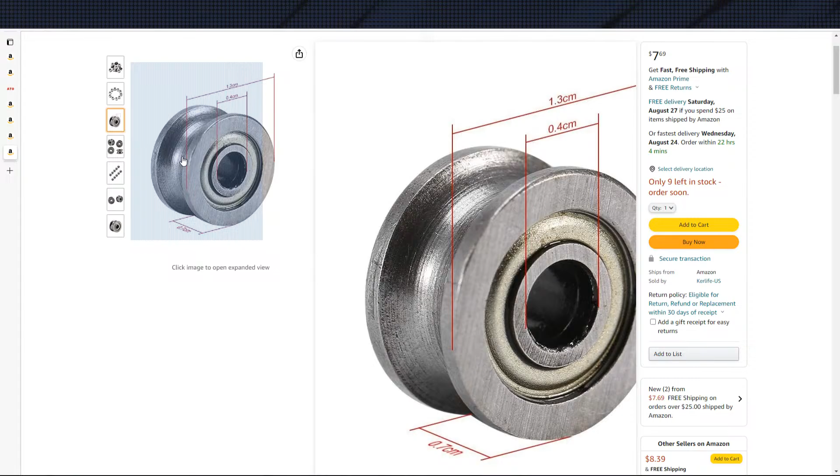Along those lines, this U-groove on this specific model, you can see it says 5.2, which sounds too big to me. The depth on it is only 1.8, so it may not be too big. However, I'm pretty sure that's too big for the 5mm rods we were looking to use, because that should introduce slop up and down, perpendicular to the rod, since you have that extra space. So I'm guessing these ones in particular are a no-go. However, we do have other ones with smaller groove width. Here we go, this is 4.5, and these ones I believe were even smaller than that. Yeah, that's 4mm right there. These are V-groove though, so these ones are V-groove, these ones are U-groove.

I'm assuming anything under 5 should work for us. I have not bothered grabbing any CAD models yet, I'm just going to do a quick model up and we'll go from there. Otherwise, I believe that's everything I wanted to touch on to get us prepped for this stream. So we'll switch over to Fusion now.

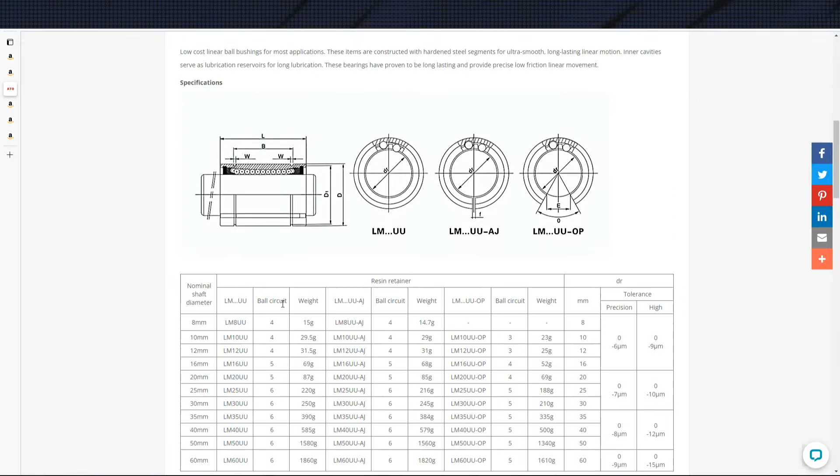Okay, if that 15 is the OD... okay, I thought this was D. Okay, my bad, I can read, it's fine. This D is the OD, so this chart is actually split up and down. I thought these were two separate ones, I thought these were like LM90s, honestly, is what I thought I was reading.

Okay, gotcha. Although theta is still missing for this first line, which should be our 8. Everything else says 80, and I still don't see E anywhere, unless you do. Do you see E? I don't see E. If I had E right here, then obviously I could figure out what that angle is easy, but I do not see the E.

Let's see if we presume those are 10. So I'm going to guess, because the angle gets smaller as we go down, that the LM8 open type is 80 degrees. Now this is very concerning right now, because A, this was the only place I could find these listed, and B, it's not even on the technical chart here, the open type, which suggests that maybe they don't sell it.

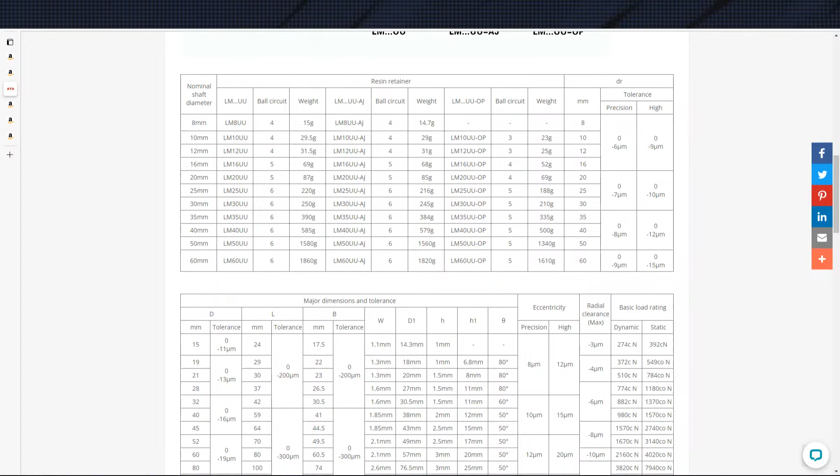So if I hit the add to cart button and tried to buy it, I might run into some issues, so this might be going south very quickly. Again, I wasn't planning on it, but might in the future do it for fun, and that doesn't appear like it's going to work. I just minimized that for you guys, so let's kick you back over to Fusion.

And we are just going to go with 80 degrees and hope that that is acceptable. Grab the outside, and hope we can actually eventually get these.

This is a solid model, I found out. I went to earlier on. Let's see, really quick, let me get a vertical. I went to slice it earlier to look at what bearings were on the inside for the informational stream, and I noticed that it was a... click, please.

Huh, fascinating. Okay, I noticed that it was a solid model, unfortunately, so when we slice this, it's just going to be a wall, is what it comes down to. Distance, symmetric, all... there we go, so you can see it just ends up being a wall. I had been hoping that these models were actually detailed with bearings earlier on, because I wanted to know what the bearing size was. They are not, but frankly, it doesn't necessarily matter to me.

And there we go, now we have the open type bearing. And now we'll go ahead and model up really quick the U-groove.

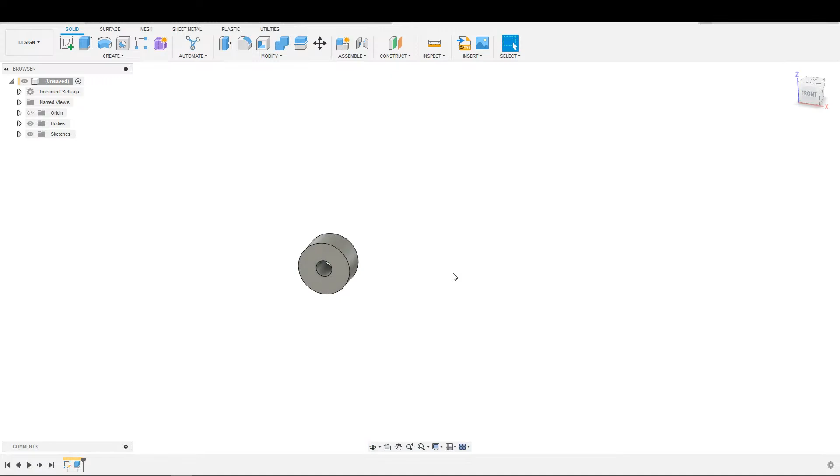And let's see, how do we want to model this? We don't normally do sweeps, so let me do a sweep here. Intersect that guy, body that guy. There we go, there's that.

Here is my circle, this is dead center, the depth here. So I guess I will, one of those things, 1.5 ways to skin a cat. I think I'm going to do this and just make this tangent to keep my life simple. The depth on the groove is, and it's possible that instead of this being a circle, I need a spline line. I'm about to find that one out. U-groove depth, 1.7. 1.7.

Actually, I take that back. This needs to be there, and then we can check the diameter, because that would be the opening. So 3.4 is definitely smaller, so it definitely needs to be a spline line or an ellipse. We have ellipses, right?

Yeah. Let's see, let's do that. We're gonna quinky-dink that and make sure you quinky-dink that. Good. And then this opening is 4.5.

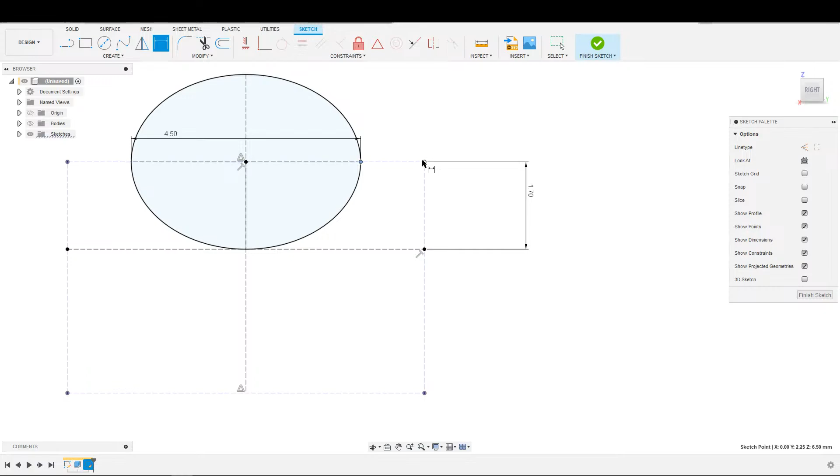Alright, that says 4.5. I guess that's about right. Back to zoomed in pretty close here, so it's just playing tricks with how it looks. I guess if I zoom all the way out, it probably looks more correct.

So let us now try to sweep, because again, I do not do sweeps very often. Sweep. I don't think a revolve is going to work, but we can always try revolve next if that doesn't. Sweep. Cool, there we go.

Nice, sweep worked. I'm kind of curious, so let's try revolve too. The revolve will go around the axis. So yeah, actually revolve should work as well, because I have this axis right here. There we go, 1.5 ways to skin a cat.

Actually, that came out with fewer defects on the surface. So if I suppress this real quick, you see how we got these little random defects there, whereas with the other one we don't. So I think I'm going to just stick with the revolve.

I was going to do sweep just because, again, we hardly ever use the sweep function, but as it turns out, the revolve one looks better.

And that is - so the only question is, do I want to put the little bit of effort in just to separate the bearing from the wheel? I wasn't going to. Let me take a quick look at this picture.

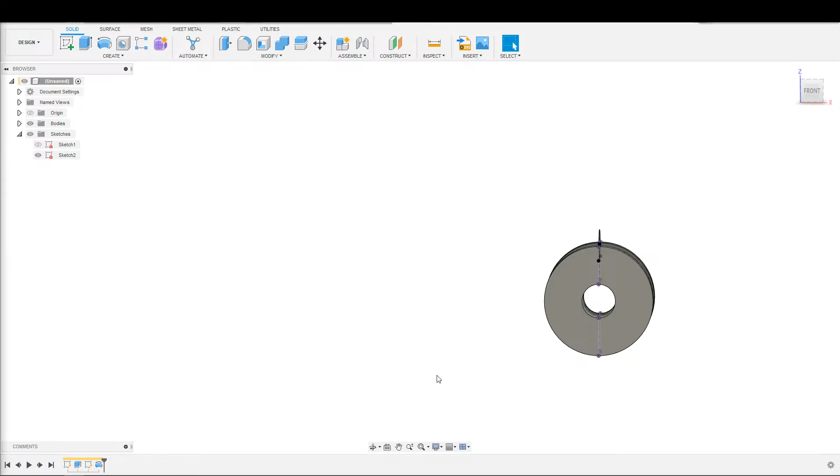We should probably get back to designing, because for my purposes, I don't particularly need the bearing visible in there, so we will just hang out here, leave it as is. Oh actually, I totally didn't notice because the sketch was there.

We got a line on here, top here instead. Alright, you know what? Fine, if I'm going to end up with a line either way, we'll do the sweep one. Oh wait, there's a line on 2 sides now.

Alright, how anal do I feel like being? Just one side? Alright, just one side, we'll live with it. Alright, and save that as U groove.

Let's see, do these have - what are these referred to as? Alright, it doesn't look like they have a code, like a special designation. So I guess I will just say 4 ID, 13 OD - I'm going to leave the thickness out - U groove bearing, and that will be fine.

And now we can go ahead and start working on the linear slides for both types. So do I have a random 8mm rod just for the heck of it?

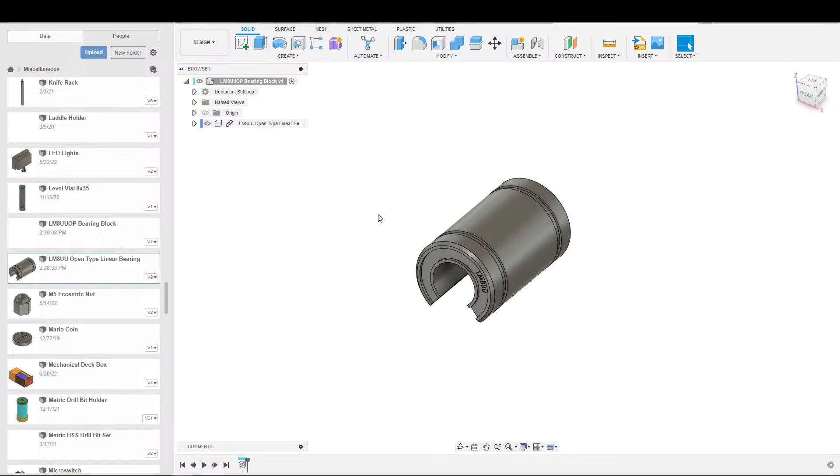Let's see, we're only doing the bearing block in this design, so I'm going to go ahead and not bother creating a subcomponent because it's going to end up being, I believe, just one solid block, so it's not that big of a deal. I'm pretty sure we're just going to do this.

The one issue that I saw going into this is how to keep this from rotating. So in theory, this bearing can rotate around inside of this block bearing holder. Now on some designs, certain sizes, they actually put a plate and rivet the plate to the bearing and to the bearing block.

So the bearing block is riveted to the bearing via this plate that they put on it. But that was only on certain sizes from the same company. It's not like I was seeing different companies do different things—it was a company that for specific sizes did that. On the other sizes, even the larger sizes, I could not tell how they were keeping it from rotating inside of this bearing block.

For us, I think my recommendation is going to be to super glue this in here. Super glue or epoxy it. It's one of these deals where I don't particularly like that solution, but at the same time, I'm going to project out this guy right here, and we're going to actually stop the block parallel with that. But at the same time, point being...

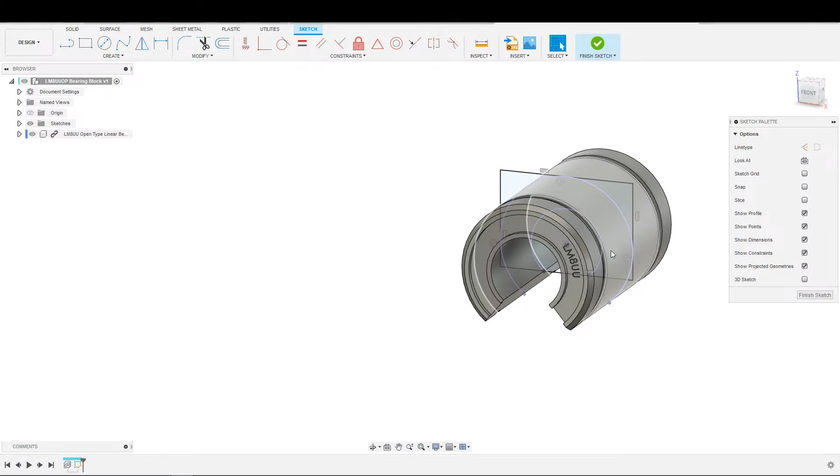The alternative is to do set screws and just put pressure onto the bearing to try to keep it from—if you drilled it into the bearing just a hair, or maybe enough that you don't damage the races, in a specific spot so you don't damage the races, and then put a small set screw through there, that would be the alternative to it.

So that's an option. It's just plastic at this point, so all you really have to do is drill through the plastic. It's simple enough to add just a simple hole in the side. Maybe I do go ahead and model that in as well. I wasn't going to—the point of this conversation was that I was not going to bother worrying about that. But maybe I'm wrong. Maybe I decide that it is simple enough to do.

Now, for this wall, it's one of those things—the whole entire point, as we discussed in the previous video that you should have watched, is to be relatively rigid. So I'm thinking thicker walls is what I'm thinking. The next problem, it's not so much a problem.

Let's see, what kind of bolts do we want to use? So to mount the track to the ground, I saw somebody say that they were using 6mm bolts. But to mount... I forgot to check what kind of holes they come with standard to mount to these linear blocks. Let us see.

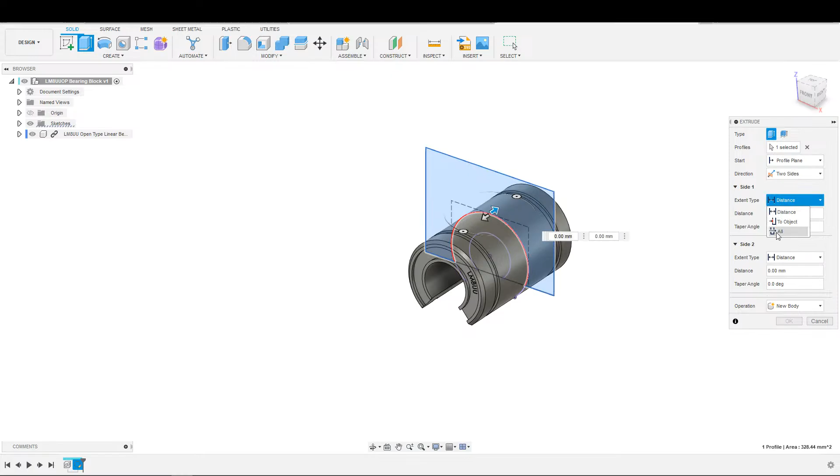And the other thing is, to help this not fall out, I'm thinking of putting a lid on the front. So yeah, I guess we can extrude this here, and then I'll extrude a second one afterwards.

I was thinking about whether or not I do an offset right here - that was the design decision. Probably not necessary, because we can just come back and hit the E button again, pop the sketch back open.

Bodies, grab everything this time, or not everything, but both of those things rather, from object, there, or actually not there, I take it back, turn the body back on, there, -3.

So again, I'm expecting there to be something holding this on the inside to begin with, so the wall thickness on the ends I'm not as worried about, so I'm not going to make it 5 like the other wall thickness.

Create feature, mirror across midpoint, which is - we're building on the origin right now, so we get to use that. Sorry, that didn't look like I grabbed the midpoint, but okay, there we go.

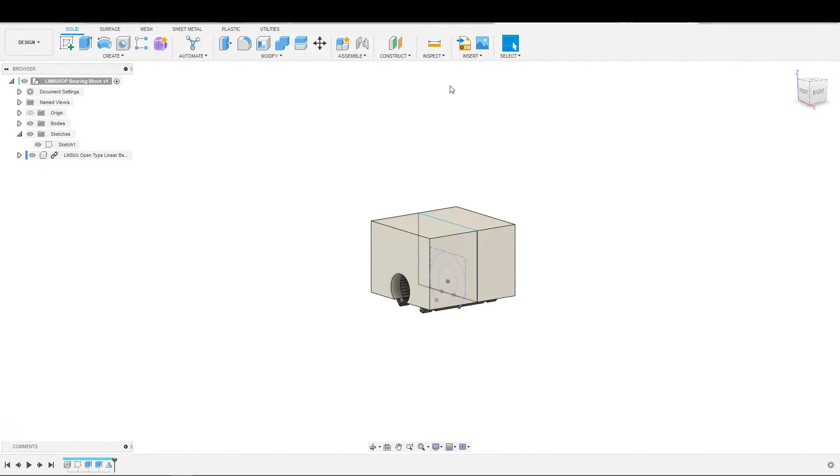Let me get this a different color just to have an easier time differentiating it. There we go. And now I want to come up here. Let us make that plane.

So this is bearing layout. Again, trying to stay a little bit more organized with my sketches, since we have down pat staying organized with the planes now. Top of a bearing block. Bearing block. There we go.

Now let us look at how these captured nuts line up. So I said, if I recall correctly, 8 point - no, it was, bother - 7.8.

Just double checking my calipers really quick. They're 0. Okay, they're reading closer to 7.85 now, so we'll go with 7.85.

Also, that line does not look center from this perspective. Huh. Fascinating. So that is, yeah, okay. Things went weird here. We will come back to that.

7.85. Let me just see what this looks like, because we need to come back and determine. Let's see, this needs to be - I guess the captured nuts could come in from either side, so I'll make them parallel to this edge. And then we'll plan to feed them in from this edge. 7.85.

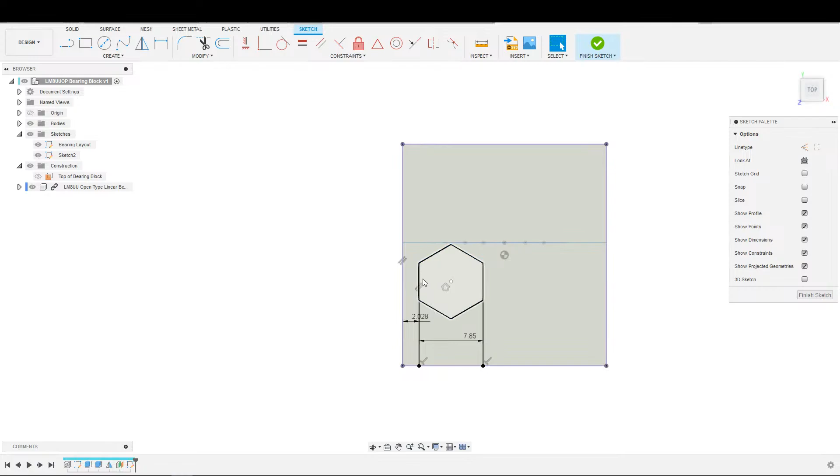So the other alternative is to feed it in from the bottom. Normally I would put a slot in here to feed this in, but that's a pain in the butt to get the bolt back out if it strips out or something like that happens. I've been defaulting to putting a hole in the bottom and pulling it all the way through. That's not that big of a deal for this design, so I think I will.

However, as previously stated, we do need a wall thickness here to keep this from rotating out, and as we can see, that does go directly through the bearing, which is what I wanted to check here.

So we have 3 options. One, we can make this block wider. Right now this is the minimum width I'm willing to make this block, but we can make it wider. Option 2 - for the record, right now we might be able to fit 4 on here, but we don't really need to.

Fact of the matter is this could go dead center, because these styles of bearing blocks need to work in tandem to stop them from tipping back and forth. So you generally have 2 sets of rails so it stays rigid perpendicularly, stays perpendicular to the platform you're mounted to.

So we really could just get away with 1 if we wanted to, put this dead center of this block, because we're going to have another one over here. Or we could have that, obviously, if we're only using 1 of each of these block bearings per rail. Then we only have 2 connection points to the rail for whatever we're holding.

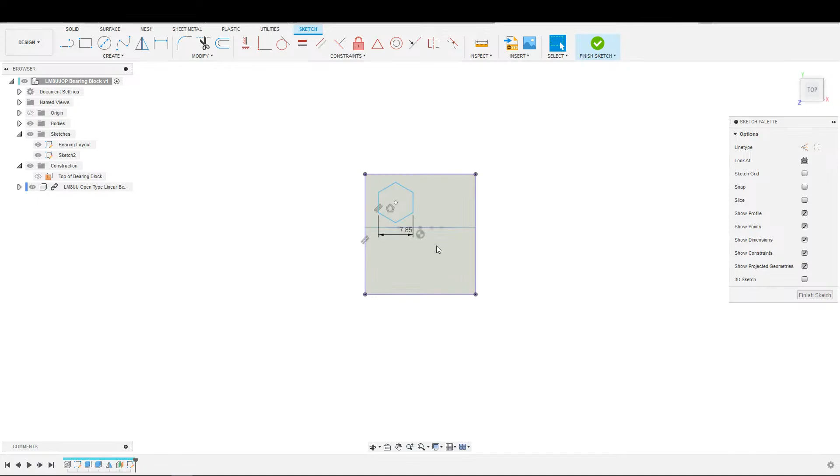Alternatively, we could have this here and another one up here, again dead center. Then from there we would have 4 points. The connection point would be dead center of the block, which is nice. Yeah, you know what, let's go ahead and go with that one. I'm going to put this dead center then, in that case. I've talked myself into it. You will be dead center.

And I actually think, instead of being parallel here, I'm going to drop it through the top. So the bolts will have to go in before the bearing is fixed in, and once the bearing is placed in, you won't be able to get the bolts back out if you glue it in. This is a problem. The alternative is to make this wider if we are going to take the bolts out the bottom.

Alternatively, we could keep it oriented in this direction and have them slide in. The fact of the matter is that if these guys strip out - this is the argument that it doesn't matter, okay? It's the argument I'm presenting right now - if these guys strip out, in that case, this plastic is absolutely worthless.

We need to get the bearing out of the plastic and print out a new plastic piece. So at the end of the day, it doesn't necessarily matter that these bolts are stuck in here, because the only situation in which it matters is if the nut itself strips out - if the threads on the inside of the nut strip out, then it matters that we can get the nut in and out. Otherwise, if it's the plastic which fails, which is the more likely scenario, the whole entire plastic piece is broken, so we've got to replace it anyway.

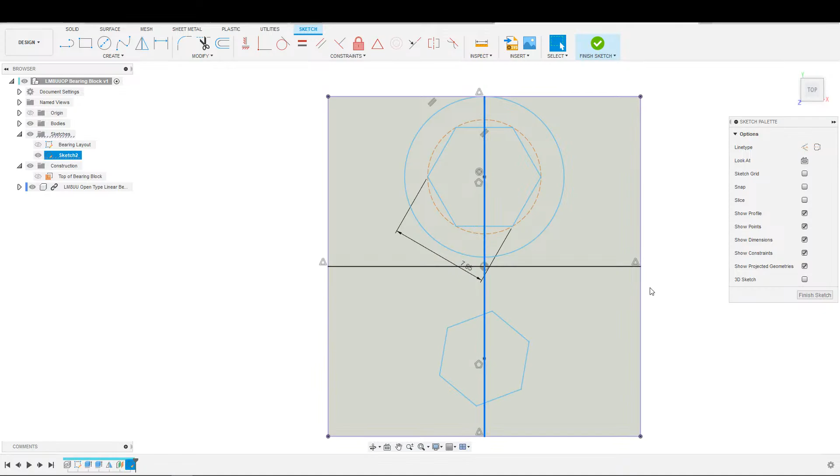I still haven't technically - I know I'm bouncing all over the place with my explanation - but let me do this: delete that, and get this centered on this line segment. Get this perpendicular, get this midpointed, and then get this guy midpointed to that. Alright, now we have an actual distance here, which is 2.8 something, so nearly 3 millimeters, so I'm happy with that. Okay, cool.

And then we can go ahead and make this a 6 millimeter hole, or a 5 millimeter hole, sorry - we're using M5s.

There we go, these circles are no longer important. Right now it's saying I am not constrained because I did not actually get centered. Okay, and you are also not centered. There we go, I'll go ahead and do this one. I had this other guy in here just in case I needed the distance between these, but the distance is going to be fine at this point.

Now let us double check our centering here because something seems to be wrong before we do these extrusions. Here is this, here is my origin. That looks centered. Let's really quick take and inspect just to make sure.

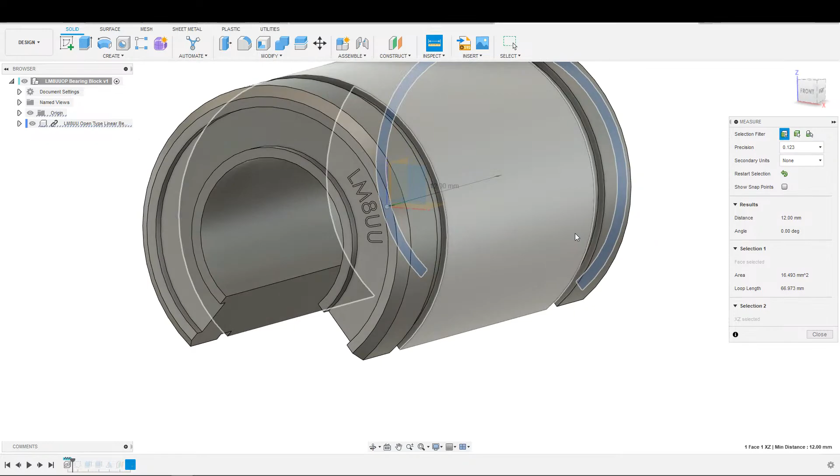That is the wrong plane. This is the farthest snap point right here. Okay, well it doesn't necessarily matter, I could do any point so long as I'm consistent. 12 millimeters, and I think these are 24 millimeters wide, so that would be accurate.

Okay yeah, so this is centered. That is good. So what happened here with my extrusion to make me off center? That appears to be centered. That looks accurate. Okay.

And that mirror does not look accurate. Okay, the preview was accurate. The mirror was not actually accurate. As always - well, not as always.

Since the changes happened, Optimize still does not work, unfortunately. It's funny because I think I've said this before in another stream, but it almost feels like they actually swapped Optimize and Adjust, and Optimize is now no longer - they're backwards now, rather, is what I should be trying to say. So it is Optimize that works, and Adjust that doesn't, because Adjust is doing what Optimize used to do, at least that's what it feels like.

So make this parallel again, and now we're good to extrude because everything will be centered. So distance all, flipperoonie, get rid of the LM8 to make sure we don't accidentally kill it. Extrude, this is captured nut, mounting hole and captured nut.

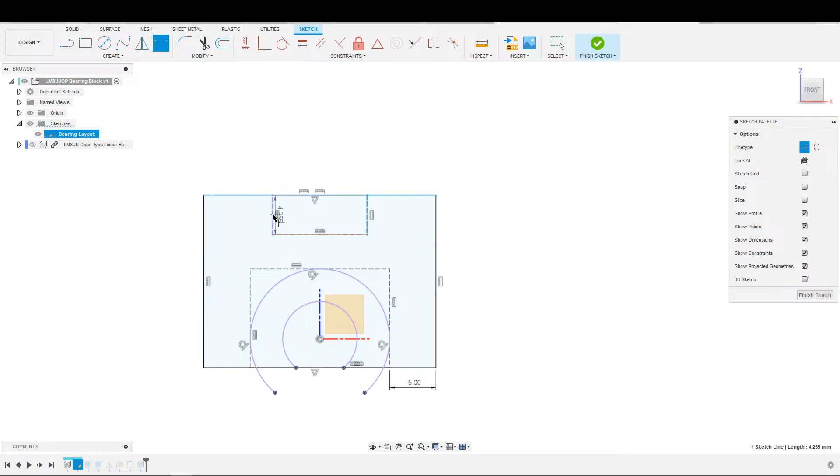Don't tell me I'm going to get this. 7.8, I think it was 7.8, I'll find out. And this was 7.85. Oh that's right, this was 7.8 I believe the first time I measured it, but it came out to 7.85 the second time. Anyway, point being is now I can go ahead and toss.

Yeah, never mind, I did this backwards. That is the nut at the top. We want - try to get a hold of that line. Please, can I have the line? Thank you. Uh-oh, I connected it.

There we go, there we go. You should be centered over here, rather, is what I wanted, because this is where the nut's going to be. And then we're going to have this 3 millimeters of wall above it. There we go, that's what I wanted to fix. And now we can go ahead and extrude this out.

Offset -3 millimeters. And distance all, actually, because again we are going to just countersink that all in. Flip that around, there we go. The bearing is still off, so we're good. And hit OK, now what is unconstrained over here is my last question.

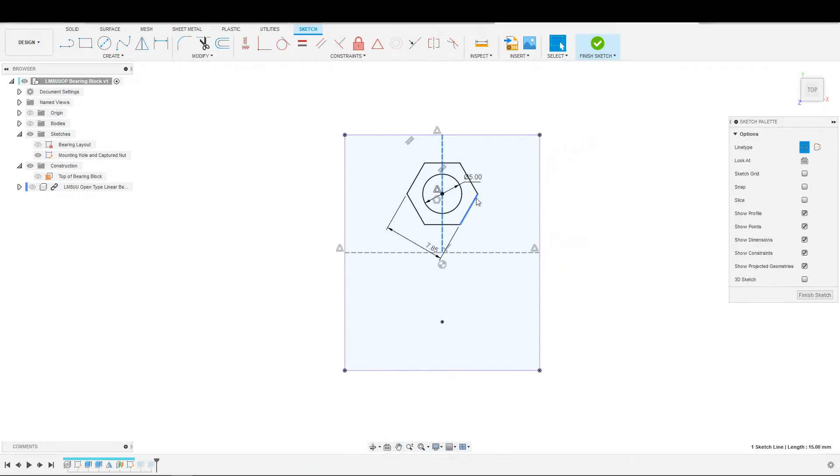I do not see anything unconstrained, but it says that my sketch is unconstrained, and I am very particular about that. So let's start dragging stuff and see if we can't make anything move. Doesn't appear that we can, so I guess I just got to give up and cry about it. Okie dookies.

So back to mirroring these features, those two. Okay. And for right now I think I'm going to keep everything tight. Maybe not this, we can probably open this up just fine without causing any problems. And I'll do a full millimeter just because it doesn't matter. And actually modify this one. Features that, okay, there we go.

And turn the 8 millimeter bearing, block bearing, back on. There we go, and we should be good. Oh that's right, I was going to add - I take it back, I was going to add the set screw in the side. Okie dokies, and I guess I may as well do it on both sides. Let's see, from the front, this is the left-hand side, right? Yep, so left side of block bearing.

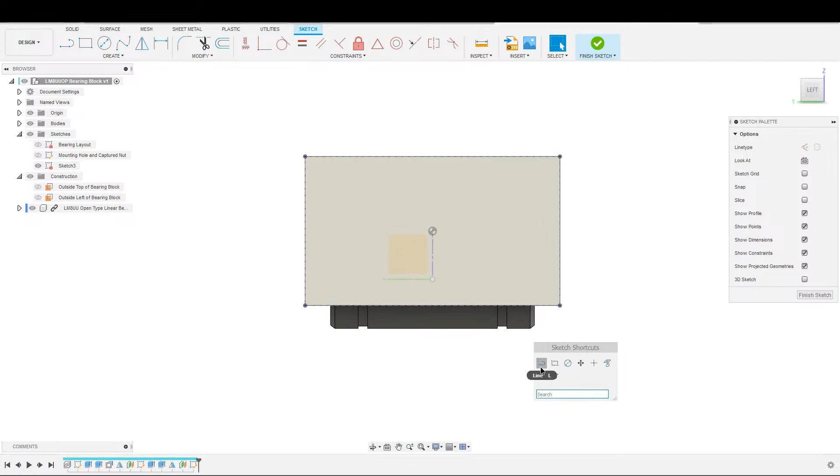Bearing block, outside, and our sketch. It's one of those things, if I do one on each side, we're probably good with just one hole. I'm going to make an M3. Normally I'd keep all the bolts the same, but because we're worried about running into the bearing races or tracks on the inside, I'm just going to make it a smaller bolt, an M3, and we'll go from there.

Distance all, flip - actually I don't have to mirror it if I do that, right? Not that one, I wanted to turn that one off. There we go. And this is the bearing set screw.

Now, the way we have this set up, back to captured nuts and threaded inserts, the wall thickness right here is only 5 millimeters. Let me double check that I have that right. Yep, 5 millimeters. Going into the side of that, looking at my box here, I think this one is a 3 millimeter, or is this 2.5?

Let's grab a 3 millimeter bolt really quick. Where's my 3 millimeter box? 3 millimeters? Yep. Alright, let me just check that this is a 3 millimeter. Actually, no, it doesn't look like 3 millimeter. Looks like it is a 2.5 just from the looks of it, but let me not double guess myself and actually physically check. Okay, yeah, that's a 2.5 then. So that's a 2.5, which will make this one a 3.

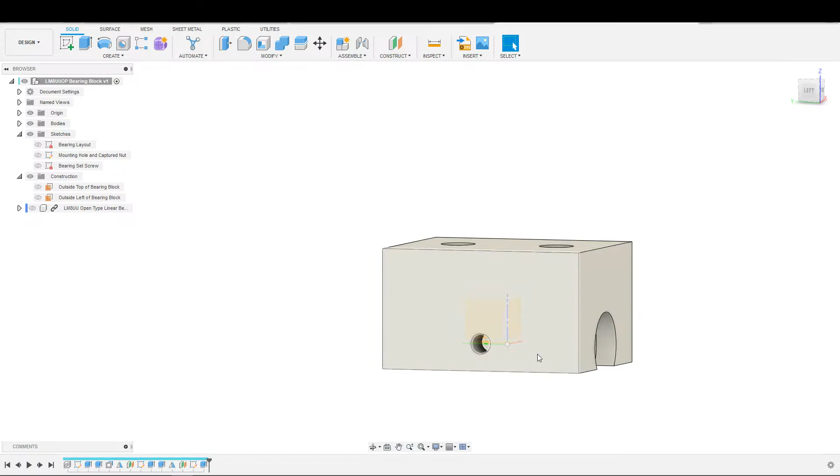But you know what, actually, here's an idea. The point being is that if you drilled a hole in the side of the block bearing - inside of the LM8 rather, not the block bearing, inside of the LM8 - in that case, you could just get away with just the M3 bolt, in theory I believe, because it would probably bite into that hole, especially depending on how exactly you drilled that hole and whether or not you attempted to thread it as well. There's a lot of unknowns here. New component, my brain not work.

LM8UU bearing block with threaded insert hole. I'll go ahead and do this really quick. We said 3.8 was the hole size. Whoops, Control Z. Project - okay, that was the wrong body it projected, so let me make sure that body's turned off. There we go, and we'll make this 3.8 for the minor diameter of the threaded insert. Distance all, there we go.

So now we have two options here. This one will get a threaded insert, the other one won't, at least on these sides here. And that is that.

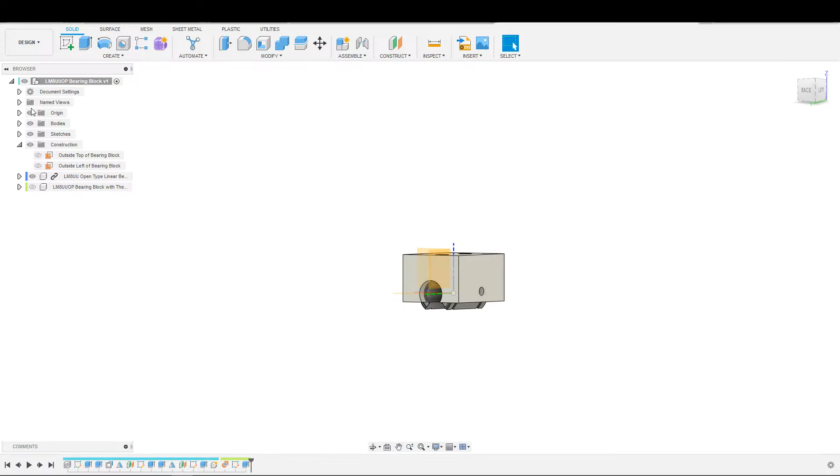So now that we have this done, it's funny because we are already 50 minutes in, surprisingly enough. I swear this stuff takes longer than I think it does.

But I wanted to just mock up how this would work. So we'd have an 8mm rod here, and I'll go ahead and extrude that symmetric, new component, and let's make this 100 for right now for demonstration purposes. 8mm rod. And let's hop in here.

And here is the rub - how do I demonstrate this? I guess from the side. So here is something I realized as we were talking about this, as I was investigating further. As I mentioned, what I found online was that they said that this - let's see, I probably should have drawn this a little bit differently, so this is going to have some extra lines that were not necessary, but that's besides the point.

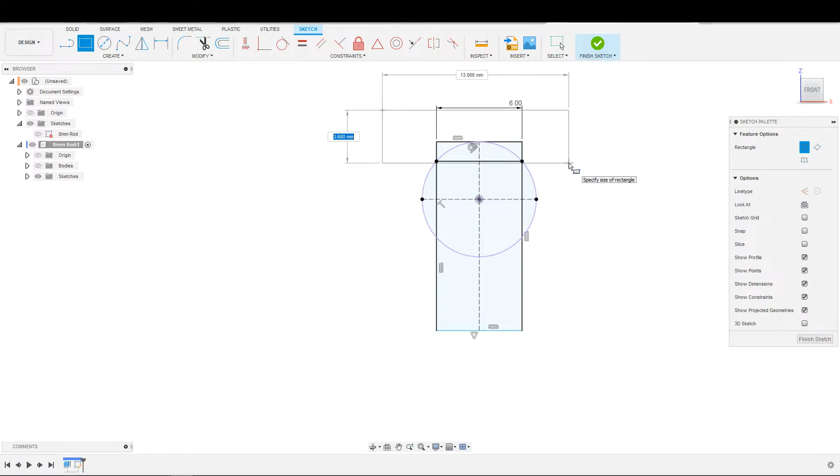There, tangent there, and point being, this is 6mm right here. Okay, so if we look at this line right here, which is where the bolt comes through, as you can see, that is massive in terms of the rod itself. And furthermore, if we draw the bolt head into here, so let's say that the bolt comes out and the bolt head is flush with that, the 6mm bolt head, I believe, was close to 10mm.

The other one I think I just said was 7.8. So, alright, I'm going to call it 10mm for the purposes of this conversation. I don't know where I got 10mm, but for some reason that's the number. Oh, that was a button head. I think the button head came up as 10mm.

Point being is that if we bolt this rod down into the ground with this 6mm, first off, you can see that there is not much rod left on the outside to begin with, which is a bit of a problem if the rod's basically falling apart at this point. The second thing is, if we have the bolt head on top, the bolt head is actually larger diameter than the rod itself, which is another problem.

Now, this is speaking specifically about 6mm, so if we change this to 5mm - okay, so yeah, the 7.8 was the nut. Let me check what the button head is here on the 5mm. Button head is 9, so the button head still doesn't help us much. However, as you can see, we get a little bit more meat here. And if we went to 4 or 3, obviously this would start looking better and better.

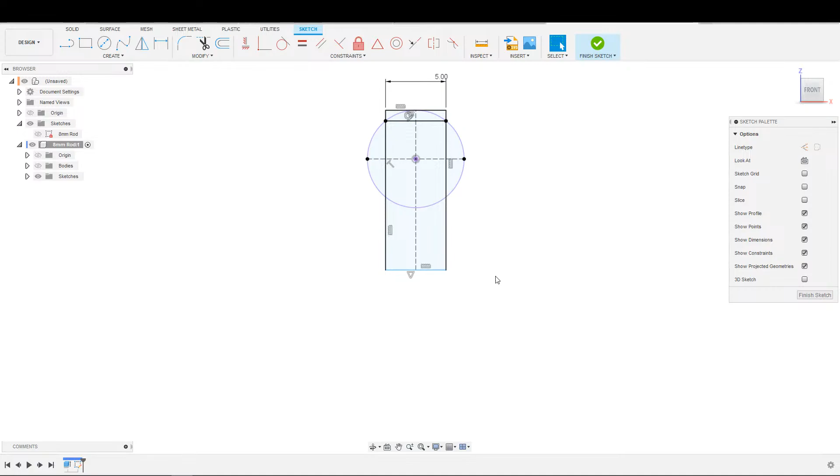However, point that I'm getting to right here is, at this point, it is not really feasible for us to bolt downwards into whatever we're attaching to, which is how you normally use the linear rails. In our case, we're almost better off - let me hit Control-Z a whole bunch, because I want to undo those constraints - doing this instead and having the bolt head down here on the opposite side of what we're bolting into.

Now, this does mean that we've got a blind hole, I think it's called. Regardless, this bottoms out here for a bolt, so we need bolts of a specific size. In this case, this is an 8mm rod, right? So we can only get maximum 4mm here, probably only 3 just to be safe, maybe 3.5. And then whatever we use for standoffs, this bolt more or less needs to be exactly this length.

Short of stacking washers. Let me pull this out a little bit just to demonstrate. Attempt to pull this out a little bit. There we go, I'll just grab that guy. Short of stacking washers behind it, which is always an option - you can always stack washers - so it becomes a little bit more complicated than normal linear rails, is my point.

The other alternative, which I'm a little skeptical of, is to weld the rods onto the bottom of this rod. Rods, sticks, whatever you want to call them. You know, just weld pieces of metal down and then attach a plate to the bottom and attach the plate to the base. That's another option.

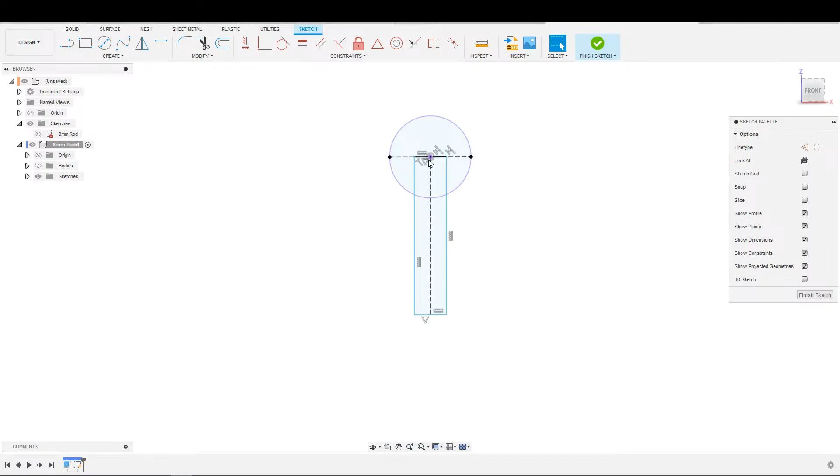So these rods are basically all chrome plated as far as I've seen. You're not supposed to weld chrome, it's bad for you. So I did a quick Google search and people said, well, grind the chrome off and then weld the steel underneath the chrome. We're already past the point of being... well, not at being a maker, but the type of content we do over here. Yes, I've demonstrated I can do a limited amount of welding, but this seems less feasible.

I'd sooner do this blind hole here, again whatever you technically call it, and just thread that in there and hope we don't bottom out. So that's where we're at on the design here. Unfortunately, it does not seem feasible to me to bolt through the top because we cannot countersink the bolt head, which is the biggest problem. If we could countersink the bolt head, then I'd do it. However, there's just plain not enough meat up here to do that on an 8mm rod. So we're going to have to come from the backside and go from there.

Okay, cool, so that is that discussion out of the way. Let me go ahead and, again, we're just going to mock this up really quick. I'm still in a sketch. Tangent off the bottom, reference plane, origin, and 180. Bottom of rod. Project. Turn the body off. Magical fusion double line - what does it mean?

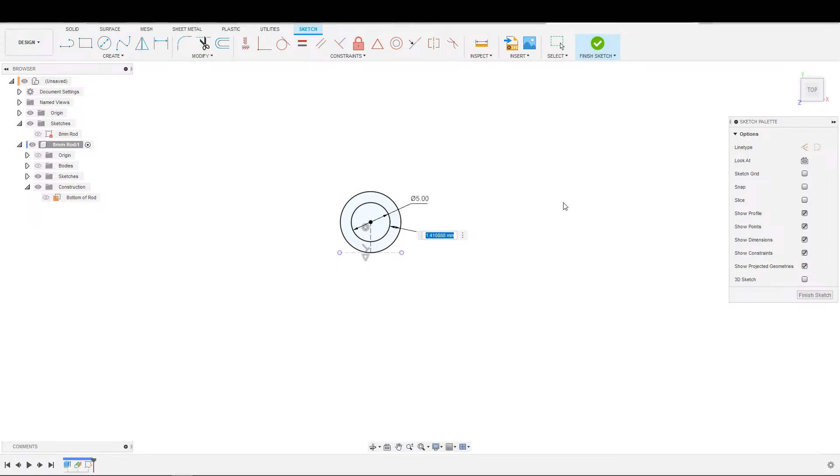Let's do 5mm. Now I'm going to go ahead and... I was going to do the hole first, but maybe I should. Yeah, you know what, this probably should have been in another object, but I'll cry about it. Again, this was in theory just for demonstration purposes. This rod is on centerline, right? All right, good. Two-sided.

Distance to object there, and then other distance is, let's say, 10mm. And these are backwards, so distance 10mm and distance to object. Whoops, wrong object, there we go. New component, I'm going to just join this later.

Actually, this would be the bolt that I've got right here. I'll just call it the bolt. That's fine.

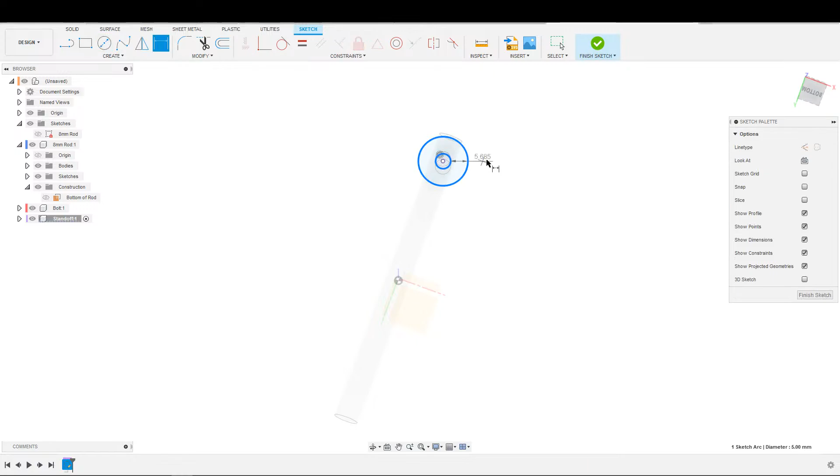New component, standoff. Come in here, come in here. Project out this guy. Toss a wall thickness in there, just like 3 is fine. And then extrude this down. Distance to object. There.

And now we can go ahead and pattern those down the line. Pattern. Whoops, that is not pattern. Pattern. Components. Actually, you know what, maybe I want to just do bodies, just because I don't particularly want to make a whole bunch of components.

That and... whoops, that and... Oh, you're gonna really do this to me? All right, I give up. This is just for demonstration purposes. Huh, okay, you're not gonna give me that, huh?

Let's find a sketch then. Oh, I never... there's a sketch, never named that sketch. My bad. And let's go every 20 millimeters.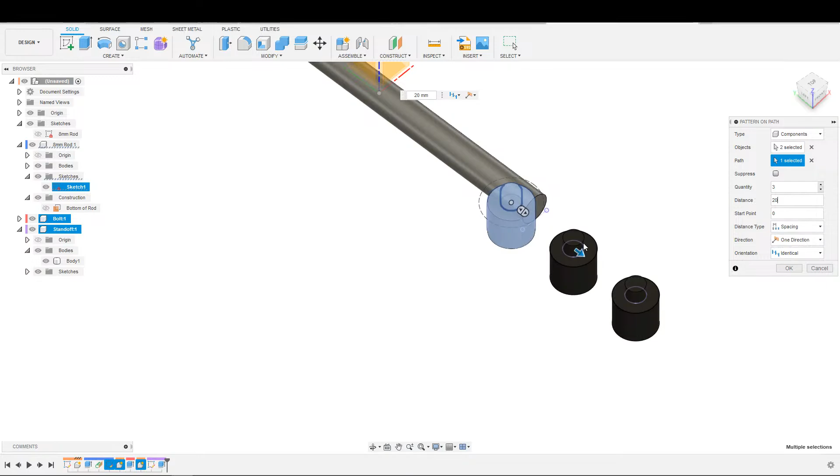Bother. You're being difficult. Alright, well. Let's see, I can't use one to flip it around. And it doesn't let me use the whatchamacallit for the path.

And now, pattern, path, bodies. Yeah, I really don't want the extra components, honestly, so let's try this now. Spacing, I really wish you would. 0. 5 is fine.

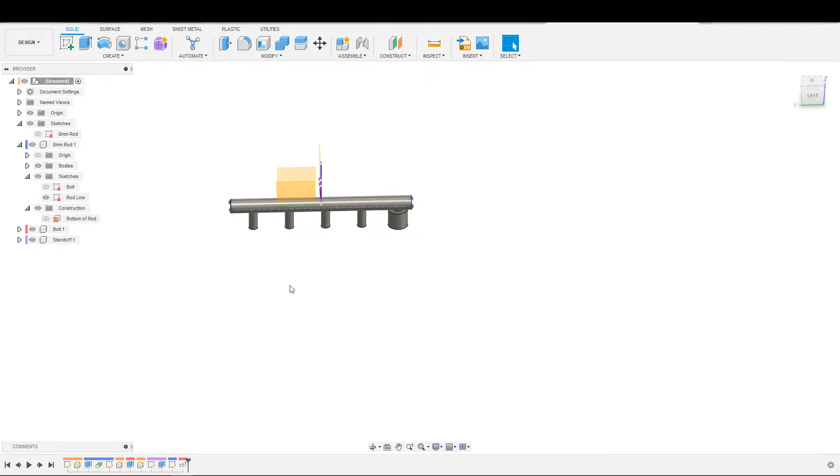And rod line. Just do the same thing on the other one. There we go, select my line. Spacing, I don't know why it defaults to extent. Nobody uses extent, it's a waste of time. You can't even use toObject with extent. If you could use toObject with extent, then it would be more useful, but you can't, unfortunately.

So it is a waste of time. Chrome. Try that again, there we go. Turn this off, this sketch off. Huh, that's... there we go. It's looking pretty ugly, honestly. Whichever. Red. Plastico.

Standoffs, there we go. Let us combine that with that. Putting more effort into this than I probably should have for a demonstration. Keep tools.

And now save so that we can insert LM8UU slide guide. Now we can insert this one into here, that one into here. There we go.

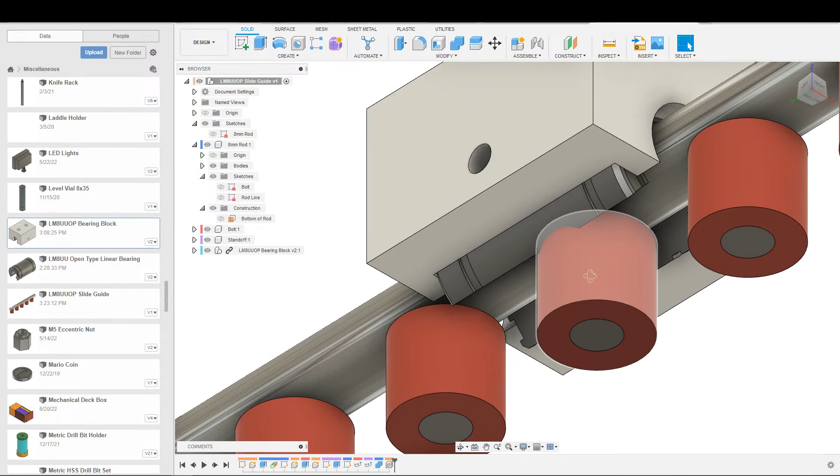And that is fine with me. So looking at it, it looks like our wall thickness is going to have to, because everything's on origin, it all lines up automatically. So it looks like our standoffs are going to have to probably be cone shaped, would be the best, just so that we can still have a wider base. Alternatively, we could always cut them down into D shapes.

The standoffs actually are not 100% necessary. So the alternative actually is to put nuts down here. So you throw nuts down here, weld them onto your platform or countersink them or whatever have you, and then thread the bolts through onto the rod. And when the bolts bottom out, yeah, I guess that's the way to do it.

So it's threading, it's a little bit difficult, frankly, but it should work in theory. In theory, so long as you have everything exactly sized correctly. You thread the bolt through the nut, which is stationary on your platform that you're connecting to. And at a point, so long as the rod is... nah, it's not great, it's not a great solution. I'm going to stop talking.

It's probably better just to modify these standoffs so that they're not interfering with the LM8 open version right here. Simplest, quickest solution. Yep, okay, so that is that. That is our first slide bearing. And we have been going for 1 hour and 5 minutes, which is a little bit annoying because this was supposed to be a quick, stupid, done build.

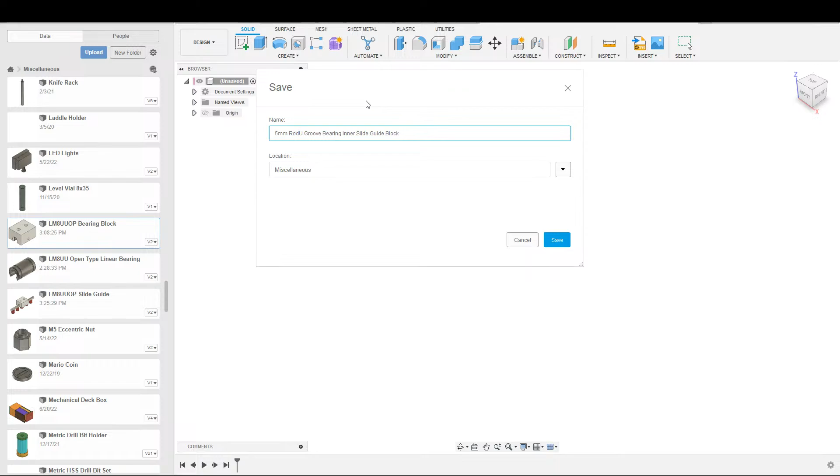I don't know exactly how to describe this, but that's the name it's ended up with. So we're going to go ahead with this one. Since this one wasn't intended to be quick, I'll go ahead and do it a little more professionally. 5mm rod, come in here, make our sketch.

5mm. Actually, I take that back. Let me do horizontal. Rod. 5mm. And our spacing here.

So the funny thing is, actually, hilarious, ha ha ha. So we're going to have a theoretical bearing right here where the OD is 13mm. In theory, I should be drawing this, technically speaking, like this. 13mm, centered here.

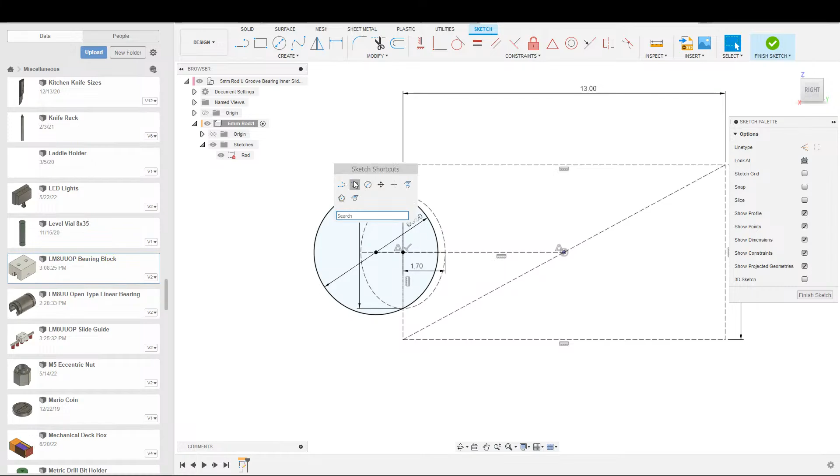So the deal here is that we are going to have, in theory, plates that hold these rods like this. And yeah, I guess that holds it far enough. The only place I was going with this conversation was back to this opening here. As you can see, that moves this further in and gets us closer up here.

But if I make that all 5, at this point, this plate, or this bracket rather, that's holding this rod isn't really holding it terribly well. The one counter argument I'd have that makes it not that big a deal is the same one we did over here on this linear rail, which is, okay, we can drill and tap in the back and bolt the rod to the bracket. That's an option. So back to the fact that we have an option for a 5mm opening.

What do you call it? A 5mm. Oh, actually, here's the other thing. You see how this U is actually outside of here? Let me back up a little bit. So there, if we had something like 4.7, that may be better because now the inside of the bearing is just about touching.

But my point is that if we ever get to where the rod is too far out of this block, the only thing I was getting at is that we can always just drill and tap - yeah, it would be drill and tap, because there's no way we're going to get a nut or bolt head on the inside here. So drill and tap the back of the rod for, say, an M3 or M2, and bolt it to the block. However, I'm hoping to avoid that.

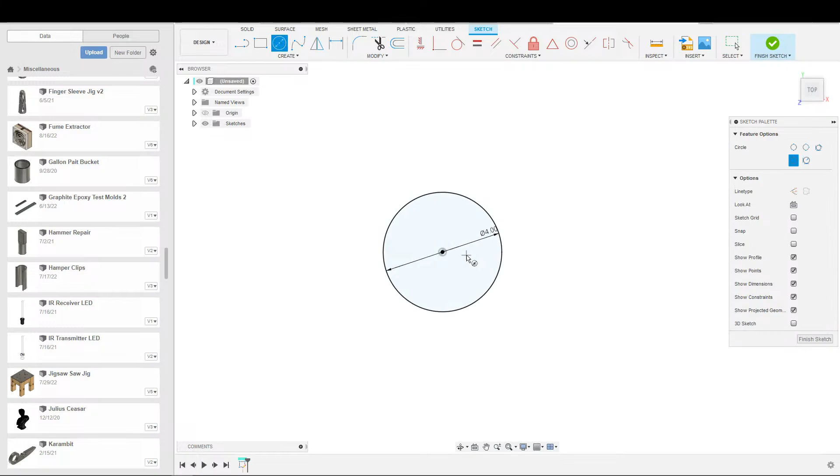Here is our ID, which is 4 millimeters. I should not make that concentric though, because we are not concentric, we are eccentric. And I want a millimeter of eccentricity. There we go.

And then it's a question of what wall thickness do I want here. I guess we'll try to do it with 1. It's one of those things, everything's so small here. I'm kind of curious what I ended up with last time when I 3D printed my own eccentric nut, what wall thickness I ended up on that one.

Can I be tangent to that? That's a good question. Alright, I can. Good. So we can up this wall thickness if we need to. Honestly, it probably should be like 2. And now it's tangent out the other side. Good old Fusion. Alright, there we go. Tangent there.

Okie dokie, so there is our top of our eccentric nut. And I'll just go 3 millimeters. And now, from the bottom of eccentric nut, or I guess I'm going to call this top of hex, because that's easier to understand.

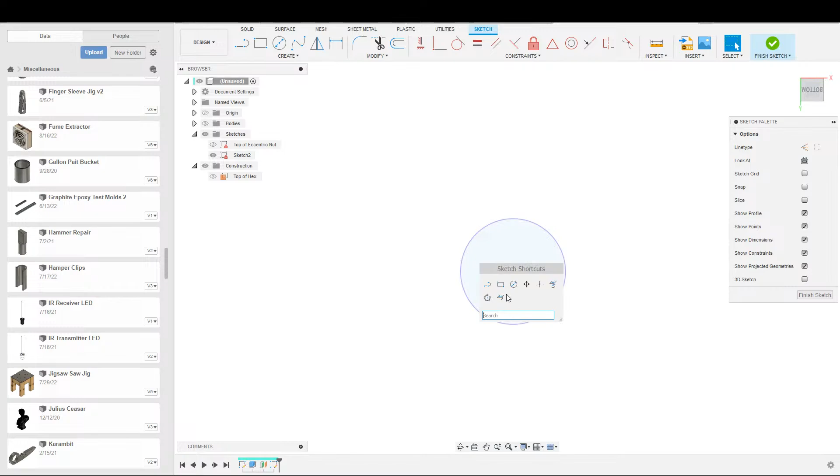One of these things, because everything's off, it makes things a little sketchy to look at. So here is our hex. And let's see what an M4 nut hex normally looks like. M4 is 6.8. Let's see, 6.8.

Alright, that is a lot smaller than what we ended up with. Let me grab the M5 eccentric nuts. Alright, let's see what proportions we're looking at as our baseline. Let's see.

Come on, bag. Actually, why the heck did I get this bag? Derp, we have one right here. This is the one that I drew though, right?

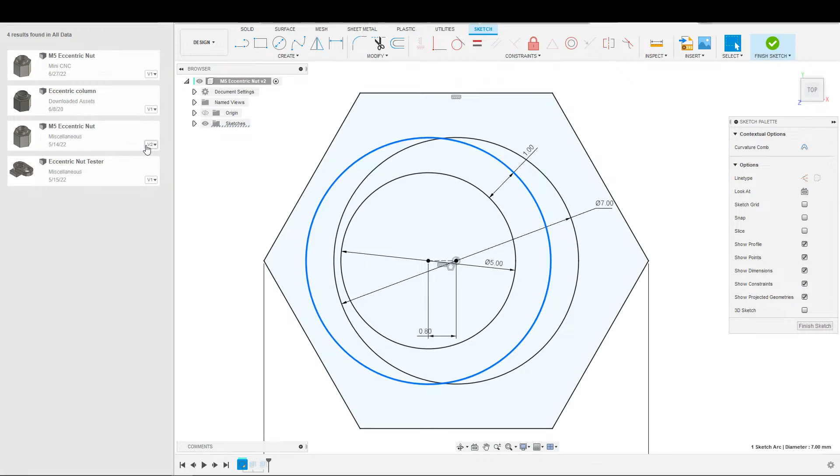Let's see. So I do not see the original one, which means that the original one is probably just designed inside of whatever project it was in, which means that I'm probably never going to find it. At least not anytime soon.

So let me see what this distance was. This was 9.5, and a normal M5 nut is 7. So the nut part ended up a good 2mm wider as a proportion. Yeah, I mean, this is a little bit.

Well, we can. Let's see, finish. Well, two things. One, let's go ahead and up this then, in that case, to 9. And I'll call that my highest point. Do I have a 9mm wrench? I don't think I do. No, I have 10.

Huh. That is fascinating, because I'm pretty sure this is the wrench that... Yeah, okay, so the M5 nuts are 10 across flats. What did I just say here? Oh, I said 9.8 is what I said here. Or 9.5, okay, gotcha. So it's basically 10, which is why I can use the 10mm wrench.

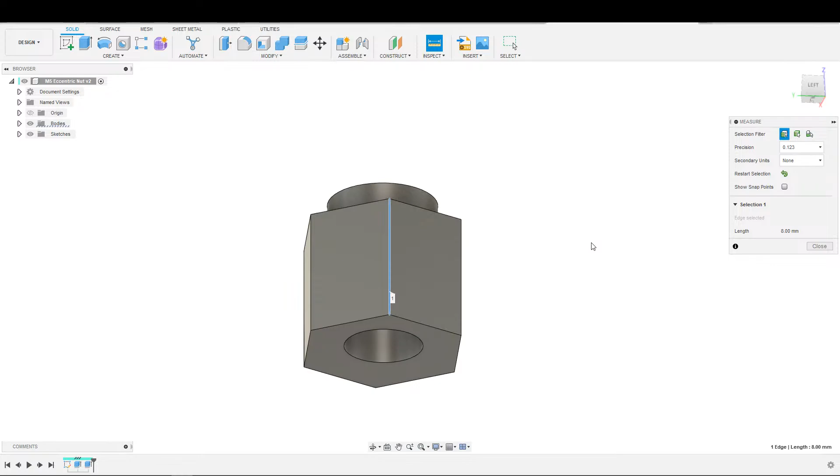Now let's go ahead and check what the thickness on this guy is. Actually, it should be like 8mm, right? If I recall correctly, it is 8mm. Alright, cool, I think we will just go with 8mm spacers then. We'll just stick with that for the time being. So that is that. Now, do I want to cheat a little bit here?

The idea here is that if my printer... let me do this really quick so I can visually explain. Go down to 1 here. If my printer does not print much of the wall, it really does not matter. There's enough wall left over that can be held by the hole it's going to be embedded in. So it's actually not that big of a deal.

So, I guess I will do that. I guess we will go down to a minimum of 1 millimeter. Obviously, we had extra space because of this guy right here.

Okay, only other thing I'm playing with in my head right now. Nah, it doesn't make a difference. I was going to say, if we could get this outside to be the same diameter as the 5 millimeter, in theory that would make these interchangeable. It's just a matter of the ID being different. But there's no real reason, I don't think, to do that. So I'm going to leave it as is.

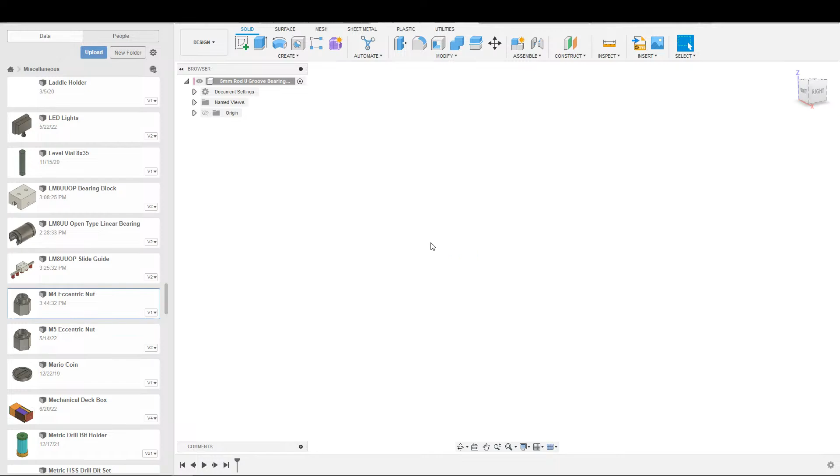And I'm inserting them individually just in case something happens. One of those things, when Fusion links copies, it sometimes can get really annoying, so I'm just going to avoid that altogether. Alright, so that is that stuff.

And then I just need a 4x8 millimeter spacer. I guess we just go ahead and, since we're using components, we'll make that another component in and of itself. Oops, Control Z. 4 and 3 millimeter wall. Sounds fine to me. That will get us to a 7 millimeter overall, or wait...

3 and 3 is 6, and 4 is 10, so actually we want that. Oh no, that's fine because our rollers are 13 overall, so we can afford 10 overall in that case. And this is 8 millimeters.

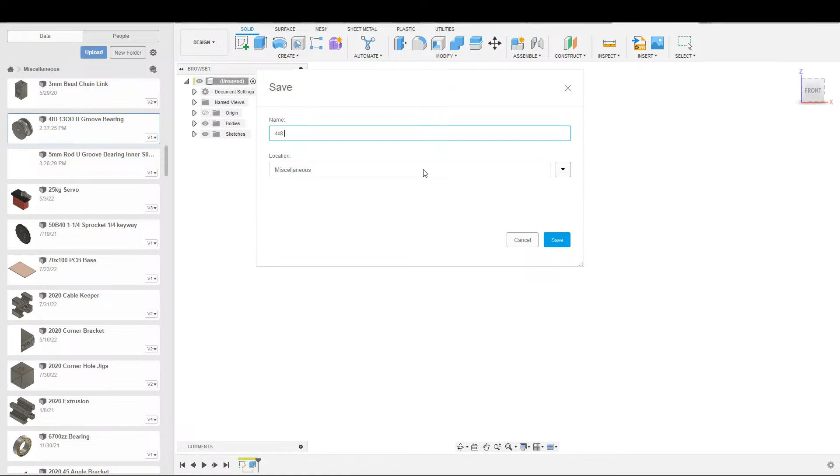Oops, Control Z. And I probably should also do this. And save that. 4x8. M4x8 spacer. There we go.

And back over to the design. Come down here. Insert and insert. You are in the correct orientation. Thank you. Insert. Okay, and now we have all our components.

So now we can just build the block. Let me... let's see. I'm kind of curious, I don't recall off the top of my head.

Just doing a quick search really quick. Yeah, okay, I was just checking because it's one of those things. I was kind of curious whether I needed to, and I guess we won't for now.

But in theory, this is going to end up just being a flat box on top with 3 holes in it. That's how simple this design is. So let's see, I guess I won't do that. I guess I will turn some of this stuff off.

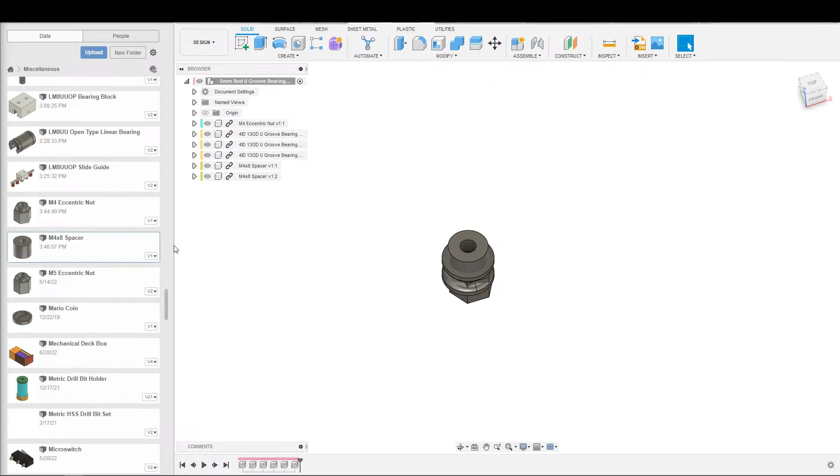Control Z. Back to what I said, we'd start for this one, we'd go ahead and include, do it directly on the component rather. So, new body. Let's see, alright, yeah, I'm going to want the rail in there just so I have an idea of how wide to make the body. So I guess we're going back to this.

Rails. Project out. Well, on the bright side, we do have this here now, so I can use that as a reference. So it wasn't a complete waste of time. I don't have to add drawings.

And actually, there and there is how I should put this. And this is a 5mm, 5mm, and that is my spacing then in that case. So I can go ahead and extrude that 100 as we talked about before and did before. Symmetric, both sides, overall. Okay. And then create a mirror.

5mm rail, 5mm rail, and now I'm calling them rails instead of rods. Actually, so that makes more sense as a rail, like the component itself, but this I really should call rod. So I'll leave the component as rails because, you know, it's the thing riding on rails. I get that, but this is definitely a rod.

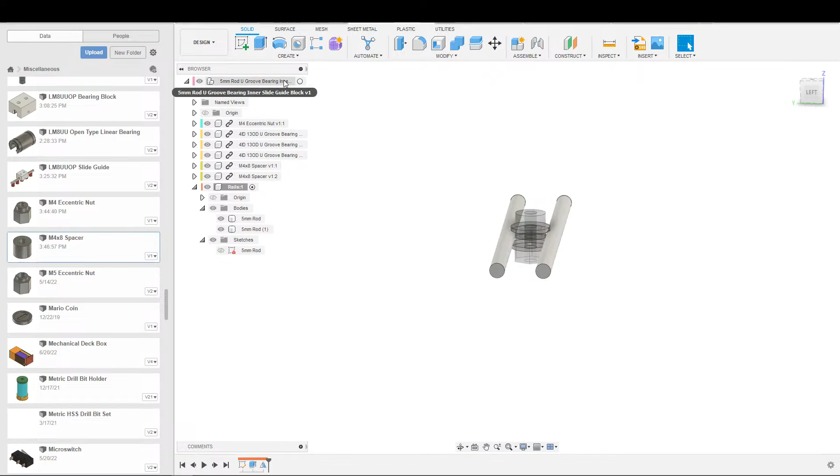And as we just mentioned, we will bodies. There we go. And now I come back up here, create not a new drawing, new component. And this is the block, bearing block. There we go.

And I guess, where do we put this? So Control Z, not Control Z. I will just come up here first. Let's get some of this organized. Not these guys, but these two.

Modify. Where's modify? Align. That on top of that. Okay. And now what I need is, and it's because one of these things, because this is an inserted object right here, the spacer, the eccentric nut.

I will go ahead and put this in the top level then, in that case. Top of eccentric nut. And before I do anything else, let me go ahead and make these rigid. Actually, just rigid joint, just to hopefully make sure they don't move. Or if they do move, they move at the same time. Now I can project everything out.

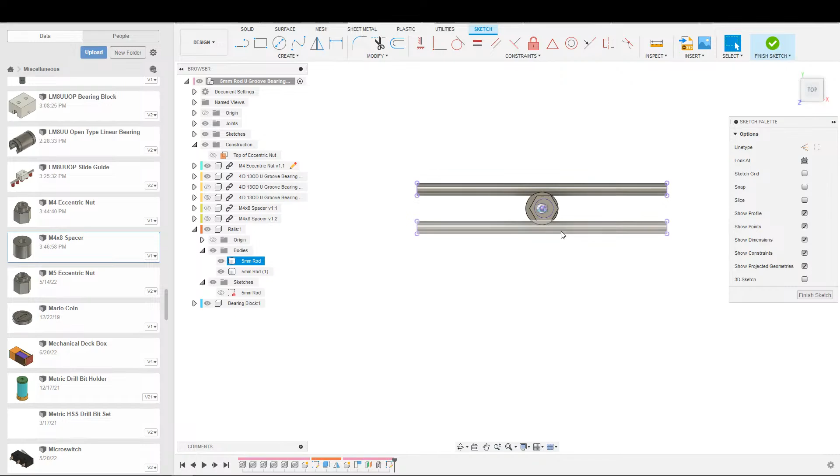That, okay. Let us see. Anything I really need to think about? I don't think so. Yeah, I really don't think that we need to think too hard about this one. I'm pretty sure everything's straightforward at this point. Oh, I take it back.

We have to be at least a little intelligent and actually go into the bearing block. There we go. That is the extent we have to think about this. It's just making sure that we're creating this in the correct area. And I guess I also should take that guy just as a reference, just so that we can see it, and then we'll turn everything else off.

And then I toss this in here, toss this in here as a reference, toss this centered on that, centered on that, and then we've got, let's say, a 4mm overhang here. And then for length, it's going to depend on these wheels here. So these are mock wheels. They are going to be equal to that wheel right there.

There we go. And then we just need everything to stay in line and parallel. That looks like I gave it... did I? Huh. Oh, okay, it got perpendicular to this is what it did. I actually want this to be parallel to the rod, is how I want to define that. And then rather centered on that guy.

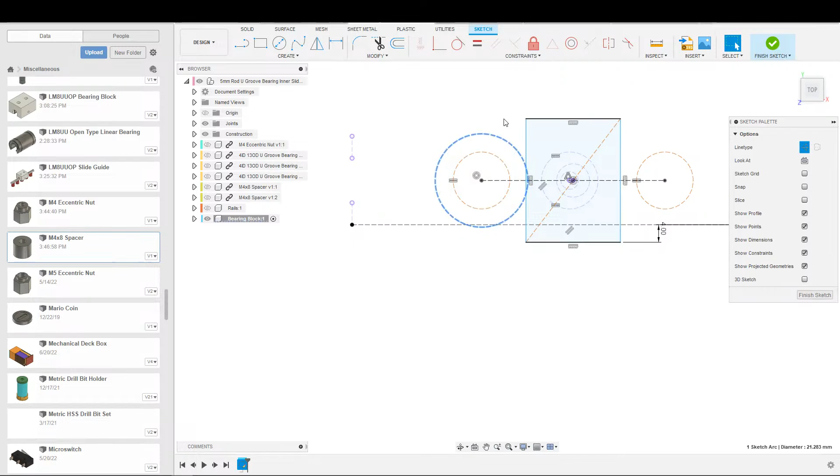And then it's a matter of the spacing between the wheels. So let me toss a random spacing circle in here. And let's say 4 is fine. And we can make that tangent to that. And there we go. Now we can determine where we want this in relation to all that.

So we have... this is going to be equal to... This is the hole in the center of that wheel. It's going to be equal to that hole in the center of that wheel because they're all the same wheels. And that is just for... actually, I guess that's not for reference. I guess I should bring these holes all the way through. These holes probably should be all the way through to the other side.

However, the minimum size we want is probably something like 3mm right here. 3mm. So this is in theory the minimum size. And then we can do anything longer than that for the block length. So now it's just a matter of making that decision.

Do do do do do do do do do do.

I think I am also going to make this solid. I was considering cutting that out later, but we can run it all the way through. It's not that big of a deal. Actually, I guess this is a little bit of a deal. Yeah, we probably don't want to run it all the way through.

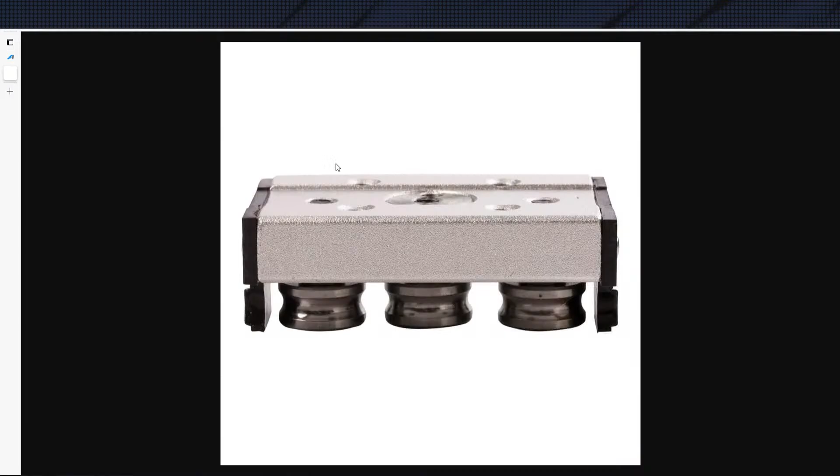All right, so now you're looking at this thing with me. So here's their adjustment for the eccentric. As you can see, clearly that's eccentric from the center of the hole. It's closer to this adjustment pin than that one. I'm trying to visualize how that looks in relation to this U groove roller right here.

I think it's just a retained disc that then pivots like this, pivots the thing like this. I think that's all it is, but I'm not 100% sure.

The other thing is that it looks like they have it slightly offset to begin with. One of those things where, again, I think we just trust, at least on this initial design, the CAD. Yeah, there's no real pictures, no other pictures that are close up.

Let's come down here and see just the block bearing. Actually, this is a different one, it looks like. Again, off center. And that disc just does seem to - yeah, if that disc... so that disc thing is off center.

I think that works. The reason I'm bringing this up right now is because you see how you don't see the spacers in here? And you can't get to the eccentric nut from the side because it's enclosed in the rail. I guess I gotta go back now to the other one. So because it's enclosed in the rail, you can't get to the eccentric nut from the side to adjust it, which is my biggest issue right now with the design I'm doing right now on here.

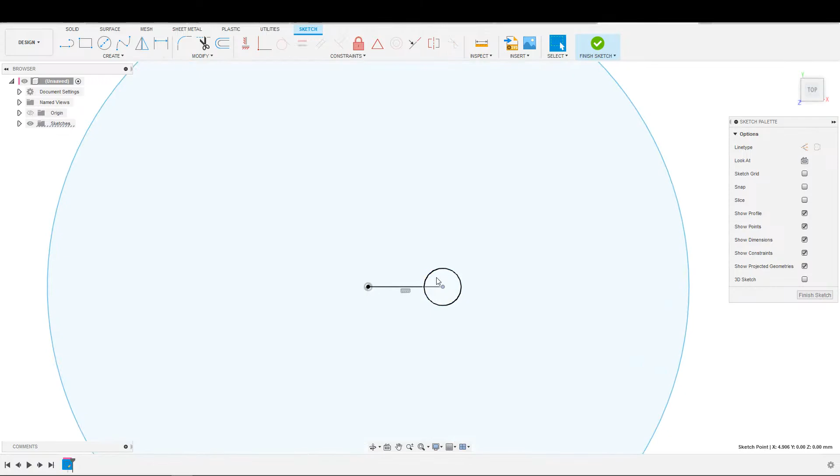This is going to be 4 millimeters. This is my M4 hole. Let's see. I'm just trying to think whether or not there's any other.

Sorry to go silent here. This is the first time I've done this and I haven't seen a real life example of it, so I'm a little concerned I don't understand this well enough and this isn't going to work. But I guess here we go.

I guess I also should determine, let's just do this perpendicular to that. That is the magical Fusion double line, thank you Fusion for your magical double lines. Center this on there. These are going to be our adjustments, and this is going to be perpendicular to that.

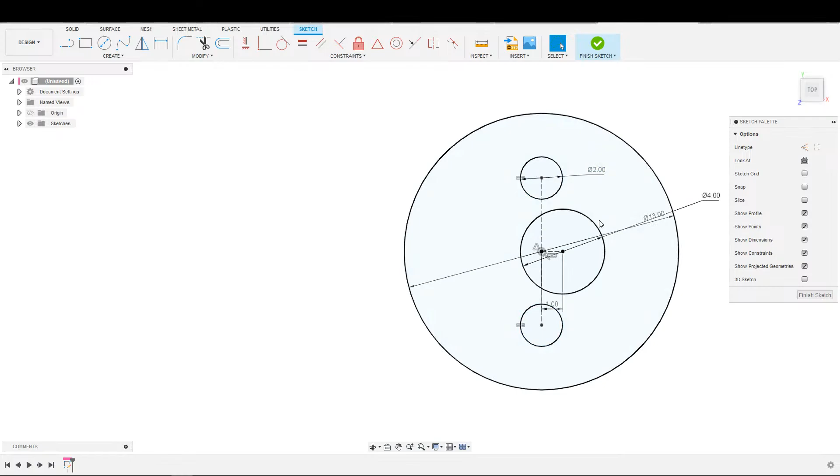The wheel is 13, so we have the 13 to work with, right? So I'm just going to go ahead and make this 13, point being.

I guess the way I do this is just give myself a wall this thickness here. So we don't have much to work with in that case.

I guess I just make it tangent to the top and say that's where we're at. Obviously the distance between this hole right here and that guy is not great, but I want to be torquing it around center line as opposed to moving off to the side here to get myself further away from this. So again, that's just going to basically be where we're at for the time being until this fails. I'm just going to make it 3 millimeters thick and pray that it works.

Alternatives is to change the design of this to use something else other than a grinder style wrench, but I don't think I'm going to mess with that right now.

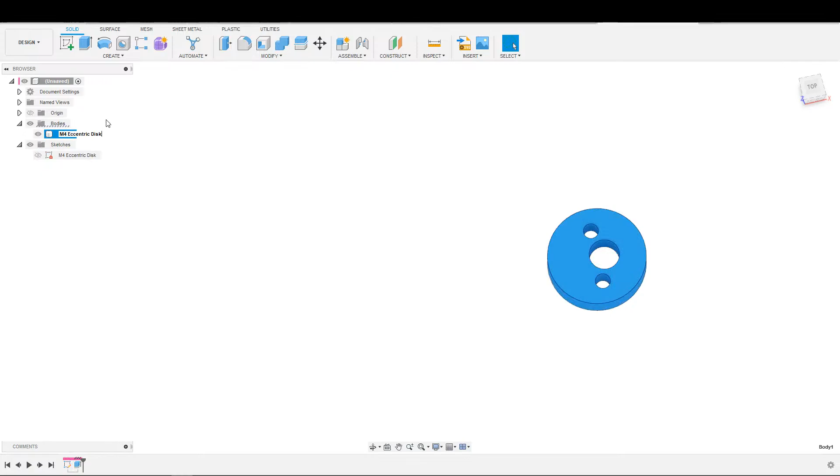There we go, let's see. This is eccentric, M4 eccentric disc. That is all that. Hit the save button, hit the paste button, hit the save button, and now come back here and start crying.

Here is my eccentric nut, there's my eccentric nut. Go back, go forwards, go to eccentric disc, insert.

Go forwards, and we also do not need these spacers now. We're going to want to make a different spacer. Actually, I guess we don't even need the spacers probably. Yeah, we probably don't. Well, we probably want a little bit of a spacer. We'll look at that in a second.

I'm going to delete these ones for now though, that would be these two. Get them off the timeline. Come back here, and we'll do that align again.

And actually this is going to want to be up a little bit. I'm going to give myself 3 millimeters of space here. So let's go ahead and move this component. There we go, and move up 3 millimeters of wall.

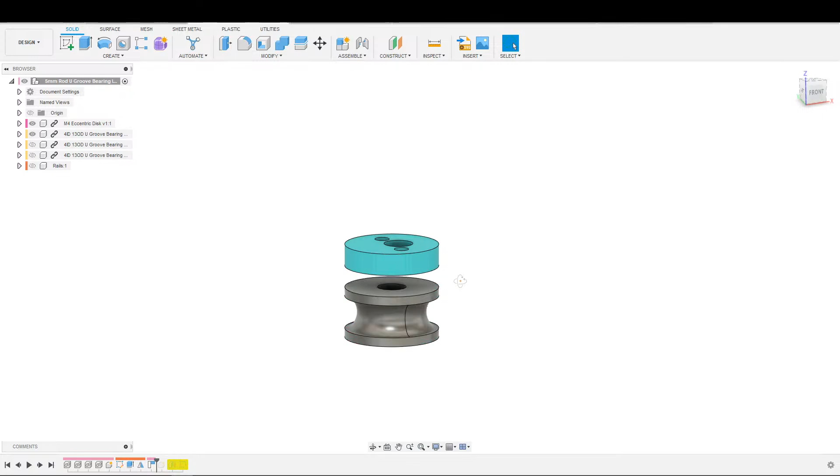And then we'll capture position, so there is that. This, okay, what was this called? Was this top of eccentric nut? Yeah okay, it's top of eccentric nut, so we'll just do top of eccentric disc now.

Please let me edit, thank y'all. Disc, there we go. And now we got to come in here and re-project some stuff. So manage loss projections, I am going to, you know what, let's see what happens if I just do this. How much everything breaks. Does not appear to have broken.

So let us see. I think what has to happen here in order for this to work correctly, why are you, yeah, you are 2 millimeters now.

Oh, you got linked to this guy instead, huh? Interesting decision, Fusion. I don't know how you came to that decision, but you did. Honestly, that should have been linked to the bearing instead. So partially my fault, partially Fusion being a little bit silly in my opinion, but I guess this is where we're at now.

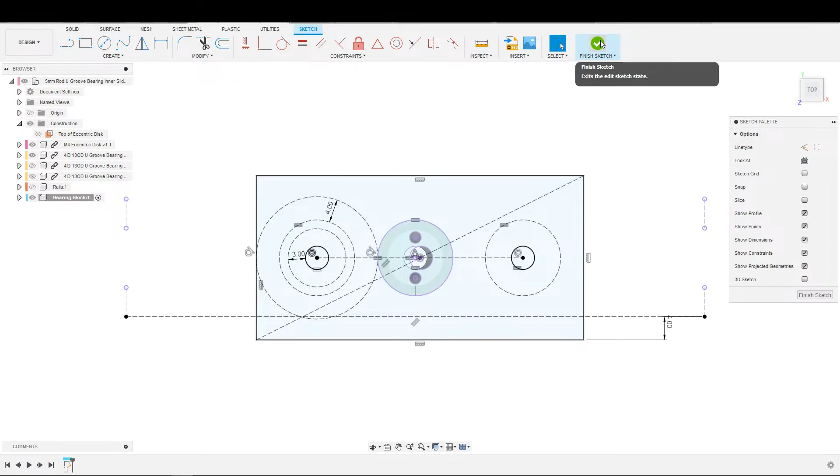Okay, so this will be extruded distance to object down to here, and then I guess what I should do is hop in here and toss a 0.5 on here. It's going to be an extra 1 millimeter overall, and on the bottom side extrude without that so that it has space to pivot is the idea here. Sketch, there we go.

So there, we don't need that guy. Yeah, we don't need that guy or that guy or that guy. And we do want that hole there.

Okay, so distance -3 from object there. And I probably should have put that up again, back to spacers between the wheels and this block. I probably should have accounted for those.

So let us go ahead and, let's see, honestly maybe I just use a washer. Nylon washer would obviously or presumably be better, but it's one of those things. It's going on the perimeter of the bearing on the inside of the wheel, so it shouldn't really matter.

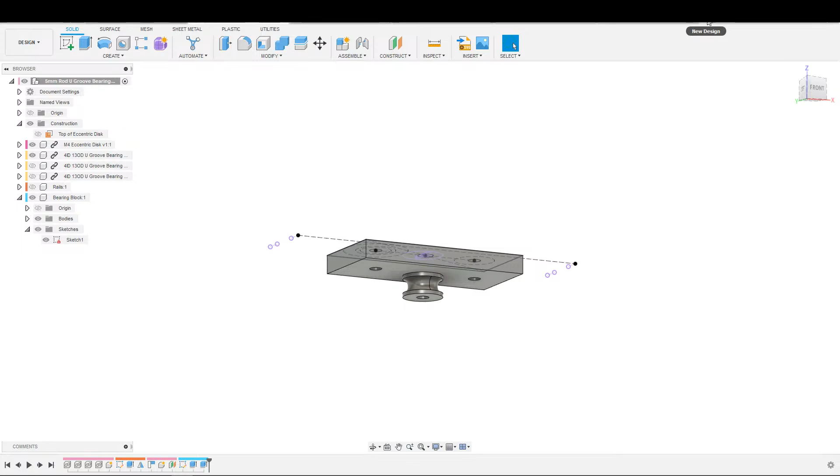So let's go ahead and model this up really quick. 8.75, remember 8.75. There is 4 millimeters, 8.75, 4 millimeters, and 0.9. Okie dokies. M4 washer, that is M4. There we go.

Okay, and I'm actually going to, instead of, I know I put that move in there, but, oh, let's get 2 more of those because we need 2 more for the other guys. Insert, okay, there we go. Anyway, as I was saying, I'm actually going to align that after I get the washer in here.

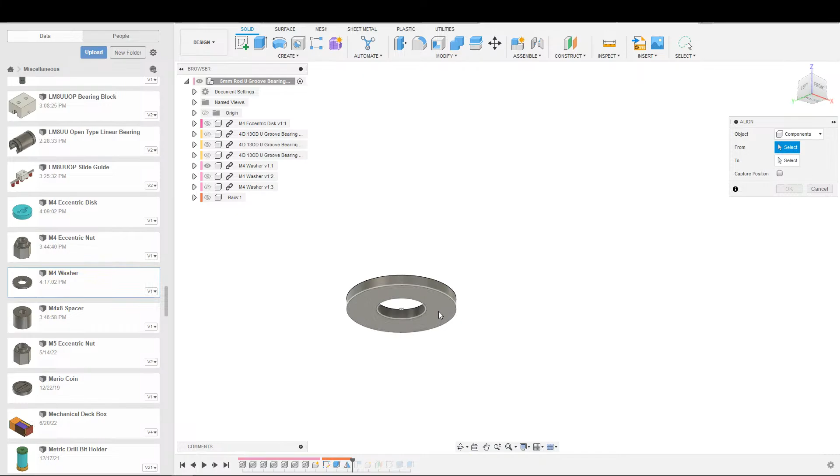So, align. Turn these guys off. Turn that guy off, turn that guy off just so I can get to the washer. Let's do that. That and that. Okay. Capture position, and now come back over here. One of those things again, I wish Fusion remembered what the heck you were doing. Unfortunately, it doesn't. So that's where we're at.

Yeah, I guess I'm just right. Just take the face, just take the face, to there. Okay, and move up the 3mm wall thickness. Finish. So that is down to there. That is down to there.

Now I should have the washer right here. The washer does appear to be flush right there. That is good. And then we have the wheel. Cool, groovy. All right, now we can go back to, I guess, lining the other guys up. Align.

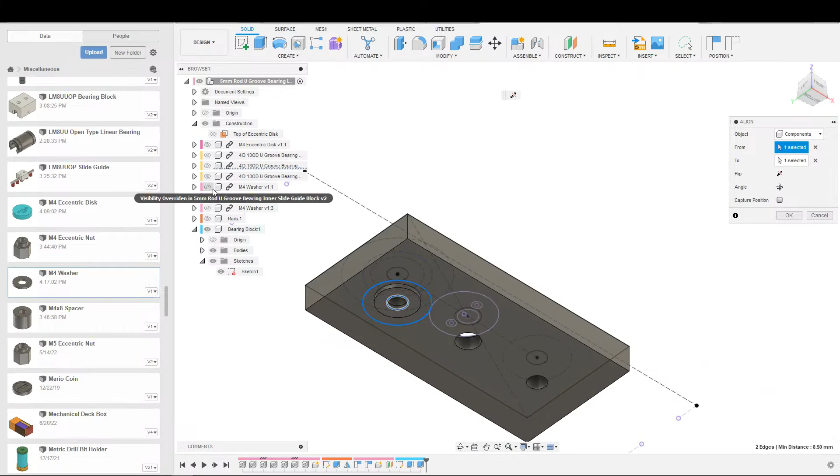Let's get the washer first. Turn this guy off, turn that guy off. So next washer gets aligned on here. Okay, and then align second wheel, center of that second wheel onto the center of the washer. Turn the wheel back on just so that we can visually confirm. Hit OK. So both of those are in the same align function, which is nice.

And then that washer, center that washer to the hole. All gravy.

Do do do. Do do do do do.

Okay, capture position, turn everything back on. There is that. Again, this is a little bit odd here, right? So let me just look at this without the, well, I guess it doesn't matter if that is in there. Okay, turn the washer off maybe.

So in theory, yeah, this doesn't really line up. Again, I'm a little bit concerned with how this is because I haven't used these whatchamacallits before, the bearing block layout. I haven't used a disc like this before for this, so I'm not entirely sure how well it's going to work, but that's where we're at right now.

Do I have M4 lock nuts? I do not, it doesn't look like. Okay, so I'm just going to, one of those things. Well, this is the design as it is.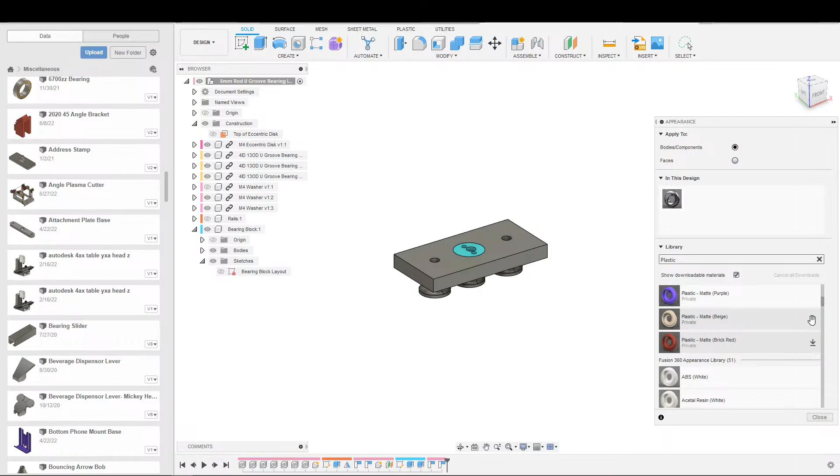Beige. Yeah, it doesn't look terrible. Okay. Yeah, so that's the block.

Again, I'm a little sketchy with this eccentric disc, how this eccentric disc is going to work. I think part of it is that I actually need to leave a gap between. Yeah, I'm almost certain I need to leave a gap.

I made that hole bigger specifically because... so I made it a millimeter bigger to give ourselves space, but it does not look like it is enough.

I kind of feel like, let's see, I kind of feel like what I really need to do is take this center and then go off to there. Maybe that's how I need to design this.

Let me turn that concentric off. I think that's the concentric I need to turn off in order to get this guy moving. There we go. All right, this guy is now moving.

So let us coincident you to this line to make it easier. And concentric on, I circle concentric on this guy instead. And then make you tangent to here. Maybe this is how I need to design it.

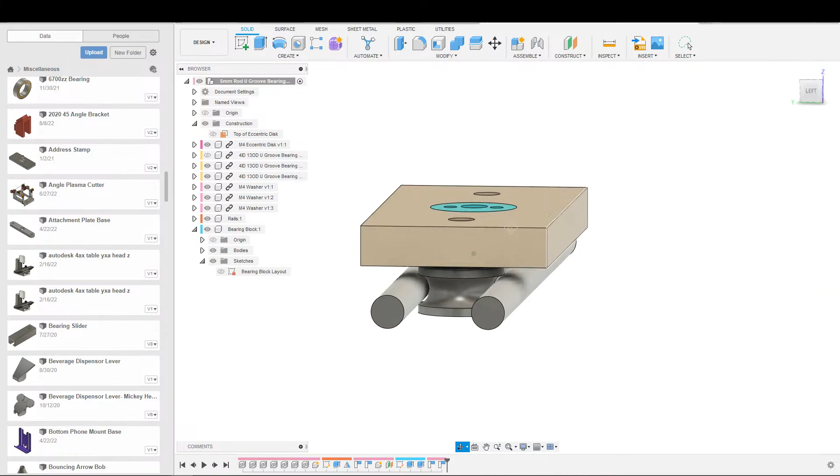Cool. Otherwise, here's our rails. The next thing I want to do is just make those brackets now. And this is another long stream, like last night.

Again, I considered when we were at the 1 hour mark with this guy over here, the LM8s, when we got done with this guy and it took a full hour, I considered breaking this stream up. It's just that, frankly, the thumbnail says a little bit of this, a lot of that, as in a little bit of the LM8 and then a whole bunch of this.

So, frankly, I didn't want the thumbnail to lie. So we are doing a longer stream now. So let us start a new one of these, and this title, groove bearing inner slide guide brackets. Save.

Open this up. 5mm. Insert. Okay. There we go. So.

We are, I think I'm going to take this off here, off the end here, and I'm just going to work off the end. And this is end of rods. We could do the center. Honestly, I could have just used the origin.

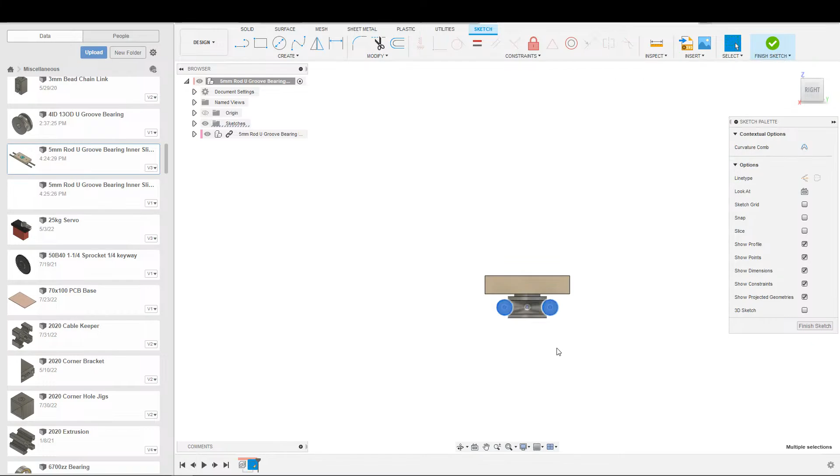Yeah, I actually do not have a good reason why I did not use the origin, so we are going to back up and go back to the origin. So here is this. One thing that I started to say earlier and then totally bailed and did not say because other things came up is actually not construction lines. I take it back.

Hopefully this keeps this from rocking. I checked the design on the website that we were on when I was showing you stuff, and they do not have bearings running this length. They don't have a race of bearings running this length to ride against the C channel that they use.

So that means that they're expecting this not to tip because these things are keeping it from tipping. I guess I'm just going to make the same assumption at this point.

So that is that. That is that little bit of information that I was going to say earlier and did not. So let us make this bracket. Again, the bracket should actually be simple like everything else, which means that it will take us another hour. Because, of course.

So here, it's here. Right angle, and that right angle should not be necessary because the other three are right angles. So let's see. I'm going to want to project.

What if I do body here? That and that is what I believe I want to project. And make these guys construction lines.

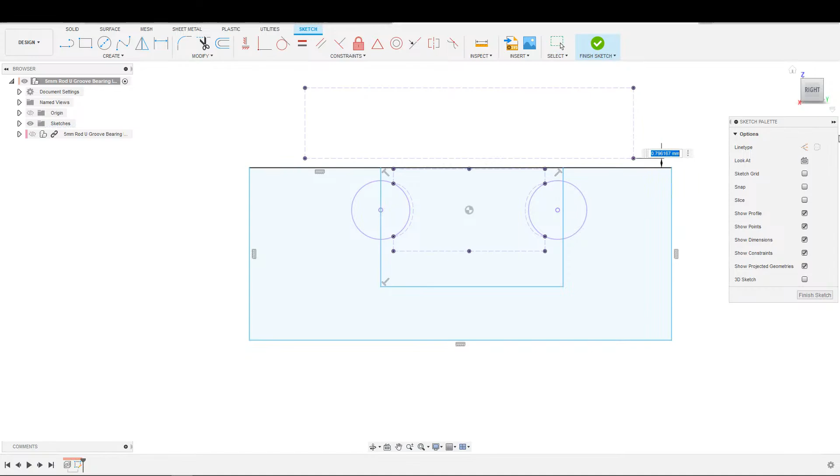This is going to have a small gap here. I'm just going to put a 0.5 here just to be greedy. And then I'm going to put a 0.5 between here and here, which is what I wanted this for, 0.5.

I guess there to there. This should fail, right? Yeah, that did fail. Good. Good, good, good, good, good. This is going to have to go point, please. Thank y'all. There's my center line. That is like that.

And this, I think, should just be coincident, because in theory this should be center. And now this should be 0.5 over here, if math works the way I think it does.

And now for down here, we need to accommodate that lock nut we were talking about earlier. So let me sketch that in really quick and grab my lock nuts. M4s are right here, and these guys are how thick? 4.8 rather, not 7, 4.8. Let's call it 5 just to give myself extra space, and then we'll butt up against that.

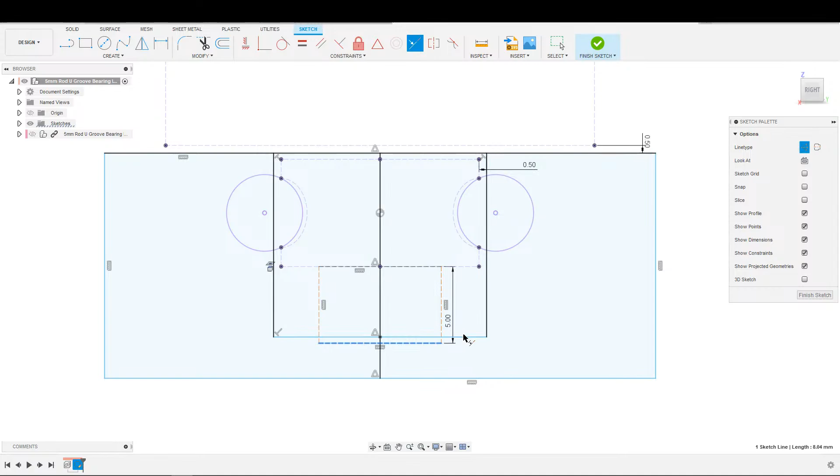So this is going to be like that, or not, I guess like that. There we go. So calling it 5 just to make sure we have plenty of space, and then we can collinear that.

And then it's a matter of how thick we want our bracket to be. On the bottom, I will go with 5. Make it chunky. And then how we want this to look. So one of these things, I can toss this in here. I can say we want 5 in here, let's say. I could do this, just to make it extra thick, extra chunky, as previously stated.

And then that slide will be over there. If I make this smaller, then the slide will overhang the sides. It really does not matter as far as I can tell. So it's a matter of preference on how thick we want these walls to be, I believe.

Actually, there is one more thing I have not considered, and that is bolting this down, because this needs to be bolted down. Over there on the website, they have their holes dead center of the track to mount it, which is perfectly okay. That's typical for a lot of these linear rails that look like this, in the block style, as opposed to the round rod style, the ride-on-the-rod style. The self-supporting ones have a single line of rows, as opposed to the ones that need to be spanned across 2 rods in order to support each other.

The point being is that I then have to accommodate for a countersink head in here. The question is, how much do I compensate? Because it really depends on how big of a bolt or screw we want to put in here. The other one said it was M6s, right? So I guess I may as well.

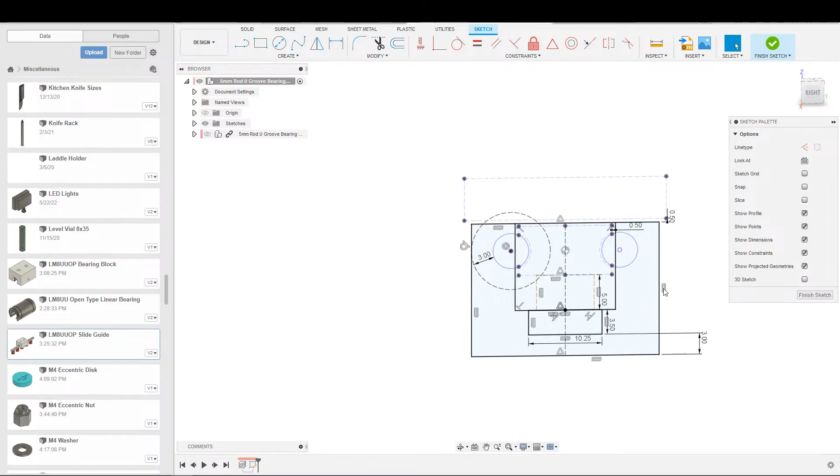Actually, this 5 may want to move down here. Does it? Maybe we just want to go 3 down here. I mean, this is a lot of plastic right here, is the only thing I'm thinking. So, I think at this point, that is it. And I will make that a construction line because we're not actually putting that in just yet.

So, let us go ahead and extrude this out. Distance, or symmetric rather, and let's make it about 1.5 inches. So we're talking something like 35 to 40. So I'll call it 35. Okay.

Next question is, do I offset this? Because frankly, I do want this hole. Actually, we got some kind of issues here. No... okay, we don't have issues. Good, I scared myself for a second there.

Supports, I was looking at supports here for printing this block. That is not an issue, we can just print the block. Let me go this way, actually. Whichever way, it doesn't matter. Stop it, there we go. But we can print the block like this, looking straight down on it. It will be down against the bed like this, and then that circle, that half circle, 3/4 of a circle, 2/3 of a circle, whatever it ends up being, will be printed just fine. So that is not an issue.

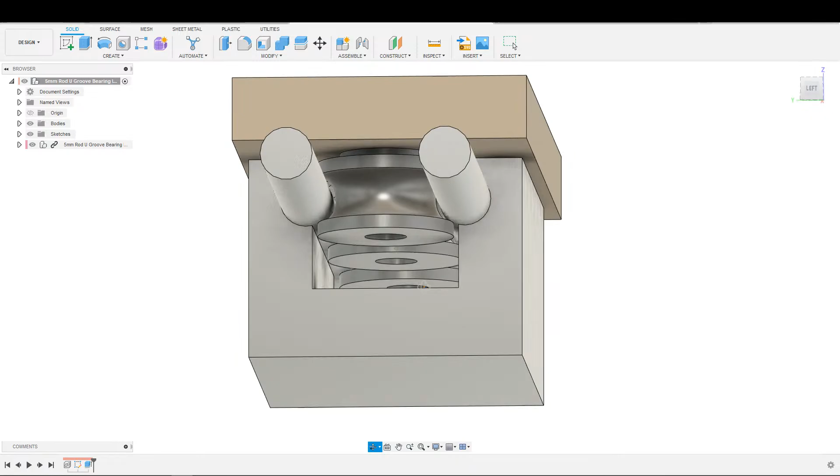The other thing I was going to say before I got distracted with the overhangs is whether or not I should come in here and open this up a little bit. I really want these to be snug into the rods. Again, worst case scenario, what we can do is put holes in here and drill into the rods like we were doing with this other guy. We could drill in and tap into the rod to keep it in place.

That's worst case scenario, but I want to avoid that if possible. So I don't think I'm going to worry about it right now. I'm going to keep that as tight as possible, and maybe try to come in with a drill bit to open this up a bit if I need it. That's going to be a bit messy because of this edge right here. Let me turn this off really quick. This edge right here, when I try to clean this up with a drill bit, is going to cause all sorts of problems - it's going to jump all over and make a mess. So I don't really want to do that, but worst case scenario, we'll come back and just print a new one, honestly.

So this is top of floor, outside top of floor, outside top of base. That's probably the best way to describe it. Do we have this labeled? Nope, we do not.

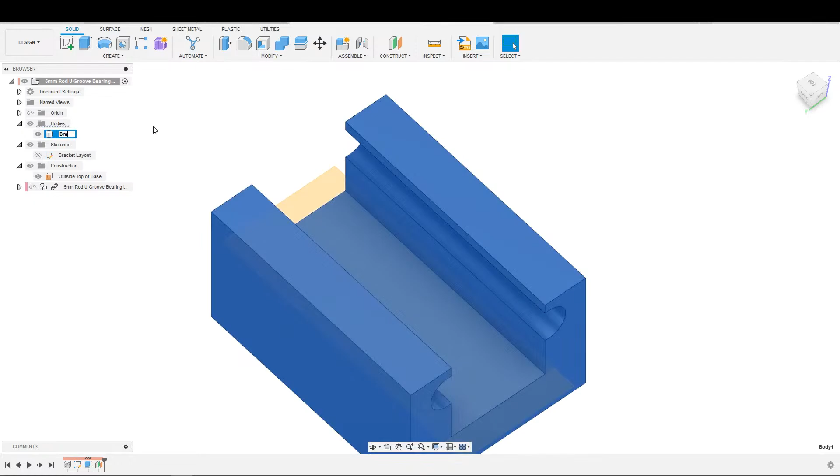Bracket layout - this is a bracket. And now I made this so that I can do the countersink for the bolt, the M6 bolt. Turn the body off like that so it's easier to get to. Center this on this. Centered. This is 10.1... I think I said I was going to do 10.2... or whatever, 10.25 is 10.25 right now. That is my decision, I'm sticking with it.

This is 6 millimeters concentric there, and now we can go ahead and I guess I'll do this one at a time. Bodies minus 2.5, was it? I guess I'll find out in just a second. Whoops, Control Z. I wanted to rename this countersink bolt.

There's another thing to talk about here, which is technically speaking, this in and of itself is not straight, right? This can pivot around the one center point. I'm assuming I'm going to have multiple of these, and the rod itself is going to keep these guys in line. We may not like that. We may decide that is a bad idea, in which case this should be 2 holes, and we should be able to fit 2 holes in here. Just really quick, I'm going to double check that logic. So let's look at this.

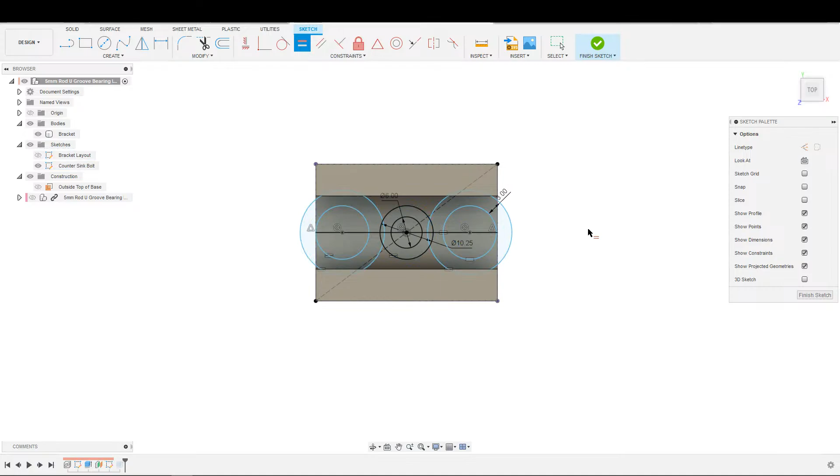And toss another one in here and another one in here. And this is, let's say, 3 millimeters, and this is going to be equal to that, and that is going to be equal to that, and that. And then we are going to tangent that off the edge, and that off the edge. Okay, yeah, so ignore the center hole here. So that would be, these are construction lines right here, just to give myself space from the edge. So that would be the countersink holes for the 2 holes. So that is an option.

And may as well just go ahead and do that in a second after we get this polished. Let's just get this polished really quick.

Countersink hole. Okay, really quick, bring that one all the way through. Distance all, flip. Okay, turn that off. Double check this guy.

Okay, that's that. Alright, I have it out. May as well check what the cross flats is. Technically speaking, we don't know whether it's going to be across flats or across points, so let's just call it 7 and be done with it.

7, just so that I can get my constrained sketch, my lock of approval right here. So this was 3.5, this was 3.5 down is the answer, and 10.25, which is what I believe I did here. Yep, that is what I did here, but this needs to be 3.5.

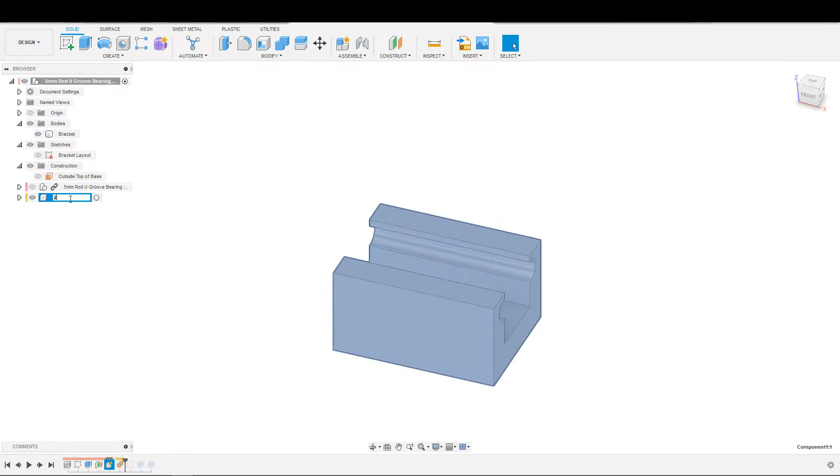There we go. Alright, so that is the single countersink. We are going to go ahead and boundary fill that guy into a new component. Select that cell. Okay. 2-point bracket.

Just come down here to do the end. Sketch on there, project out that. Not that guy though, turn that off. And honestly, I only really need the face. So...

Turn the body off now. Toss this line in here, just like we just did. This should all be familiar to you because we literally did it a second ago.

A bunch of circles inside of circles. This has an extra circle on it because we also need to do the 6 millimeter, which we weren't worried about before. 6 millimeters.

10 point, whoops, Control Z. 10.25 fingers please, thank you. And 3 millimeters from the edge.

That is a construction line, that is a construction line, and all of this is equal, equal, equal, equal, and tangent. Tangent, tangent. And now we can bring these down.

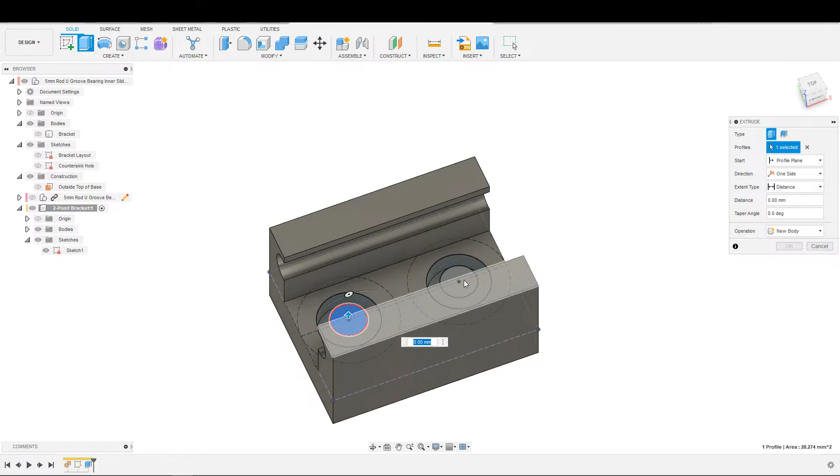Bodies minus 3.5, and all the way. I don't know why I clicked that guy. That was a little bit silly. Distance all, flipperooski.

And there we are. Just rename that really quick. 2-point countersink holes. There we go.

2-point bracket. Alright, so this one, again, can be confirmed to be straight. So, for example, if we are going against a level or a straight edge, we can line this up against the straight edge, put the 2 holes in, and then we know that that bracket is straight against the straight edge.

With this guy, with the single point bracket, we'll come up here really quick. We need 2 of these. Technically speaking, we can put it up against the straight edge, get it drilled in, but then it's going to twist out of position up until we get the second one drilled in and have the rods running through them. In theory, the rods should keep them straight. However, they are just rods, so they can bend, technically speaking. Therefore, this is not technically as stable as the other one.

Now, fascinating thing is happening right now. Where is my countersink hole? Huh? Okay, there it is. That was silly. Silly Fusion.

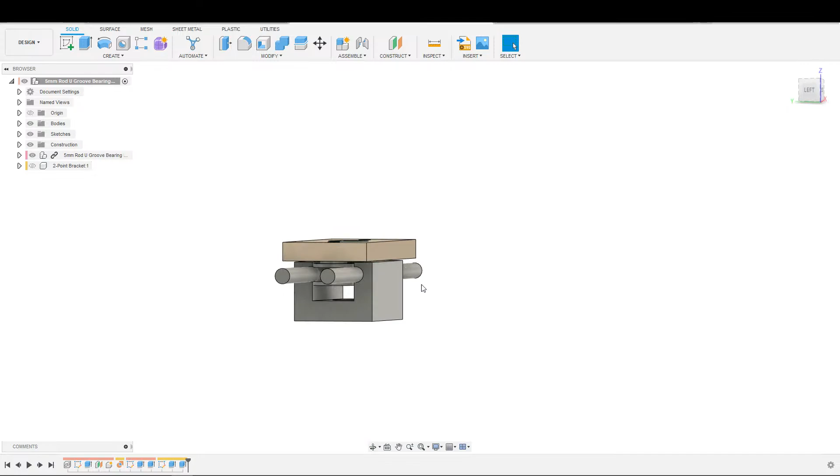A couple things to mention at the end here. In theory, this can just run off. If I wanted to, I could design one more of these guys, which is capped at the end, so that it can't run off. Otherwise, you can obviously just add a cap to the end. Just any old piece of material at the end will stop it from falling off, so that's not that big of a deal. I'm hoping this eccentric ring works as I expect it to.

I will be very sad if it doesn't. I will be printing out this model as previously stated because this one is affordable, unlike the LM8UU. So this guy, until I decide that I feel like doing something expensive, will be staying as just a dream. However, it is a model that we can look at and go, ooh, ah.

This guy, though, I will do a follow-up stream probably, or a project update stream more likely. I'll probably do a project update stream of a couple different things and include this guy in it once he is built. So look forward to that guy.

Otherwise, before I sign off, obviously, this is taking a good bit longer than I expected. And one of those things, it is nearing on dinner time. And again, post-dinner, basically point being is that I'm pretty sure at this point that the coiler uncoiler code is not getting, at the very least, not getting fixed after being tested today. I should hopefully get to the point of testing the code, but I don't know that I will have it completely fixed for an after dinner stream to actually demonstrate it on stream and go over the code.